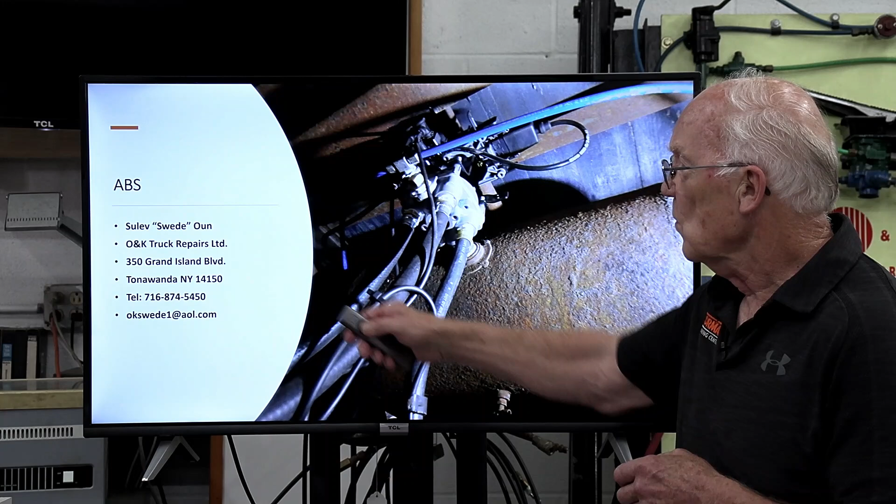I'll put this on over here. We'll click it. That's me. We're not going to worry about me. We're not going to worry about that, but we'll get into the first slide here.

But part one is going to be more or less of an overview. We'll get into a little bit of the regulatory portion of it. And the reason I want to do the overview and what ABS is all about is because it is so important. I just did a critical thinking class in Pittsburgh, and one of the things in the critical thinking slide, this was for the automotive, is trying to get a game plan. And the first thing that we discuss in critical thinking is get on site someplace, go into your information systems or whatever you're using.

The first thing you should always try to do is ask, what is happening here? How does it work? And that's what I want to accomplish, because I'm a firm believer that if you know how it works, you're going to basically figure the whole system out. You really won't need me, you just need some extra information. And that's what I'm doing.

The other reason I picked ABS as a subject is that I do a lot of driver trainings. When I get a fleet and I do driver training, it takes me about 4 hours. We cover some of the violations and stuff. And when I get into the portion of the violations with ABS, it's not antagonistic, but boy, the drivers, every one of them, they don't get it. They write up the vehicle with the ABS issue, the light is on, they pick it up next day, the light is back on, and it's ongoing, and I hate to say it, but they're like, why can't they fix it right the first time?

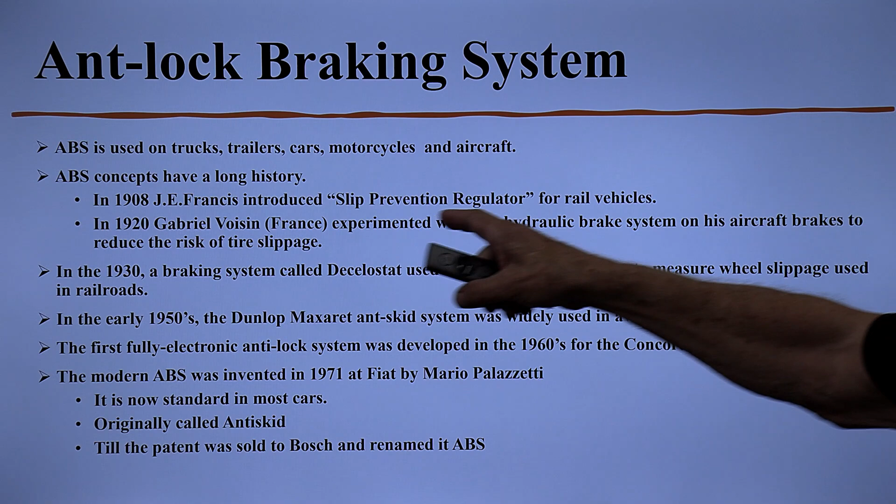Let's start out with a little bit of history. ABS is used on trucks, trailers, cars, believe it or not, on motorcycles, and of course has been in aircraft. The concepts do have a long history. We can go back to 1908, when it was first introduced. They called it a slip prevention regulator for rail vehicles. And there's a guy in France back in 1920 who experimented with the hydraulic brake system on his aircraft brakes to reduce the risk of tire slippage. And engineering-wise, that's why you always hear slip, wheel slip.

At first I was a little confused when I belonged to the Society of Automotive Engineers and I'd hear the word slip. Basically, I'm more comfortable with, hey, my wheel is ready to lock up, my brakes are coming on. But nevertheless, back in 1930, a system called Decelostat used direct current generators to measure wheel slippage in railroads. Just think about how we're looking at AC now from your sensor.

In the 1950s, the Dunlop Maxaret anti-skid system was used in aviation. The first fully electronic anti-lock system was developed in the 60s for the Concorde aircraft. And of course, we definitely migrated it into the cars.

ABS 71 at Fiat. Now it's a standard. Pretty near every car has ABS, okay? Originally they called it anti-skid till the patent was sold to Bosch, and Bosch, of course, renamed it what you guys know now as ABS.

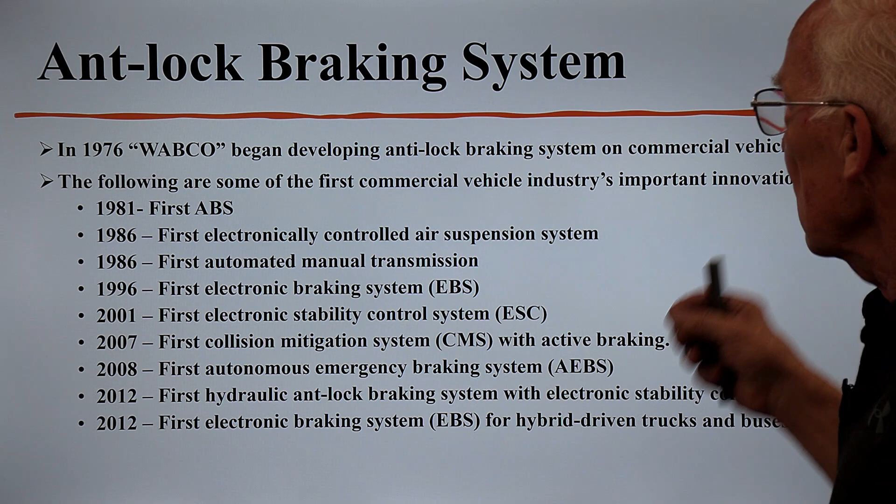So now let's jump into the commercial vehicle. WABCO, Westinghouse, they began developing anti-lock braking systems for commercial vehicles. I went online and I wanted to see who the players were. WABCO definitely, most certainly, is a huge player. It started out as a huge player. First ABS, electronically controlled air suspension, automated manual transmission, and you see it on the list.

But when it comes to ABS, this 2007 collision mitigation system with active braking, the ABS is the foundation for any of that stuff there. And of course in Europe, very big, EBS. Okay? EBS, look for it to come into our country as a mandate.

Now, ABS history as far as my time, when I first started, required in 1975 under the Federal Motor Vehicle Safety Standard. It was kind of an indirect requirement. That was a pivotal year where, with the Federal Motor Vehicle Safety Standard 121 pertaining to air brakes, they came up with all sorts of tests that the manufacturers have to do, pressures, thresholds, stopping distances, and so on. So the easiest way to do it was, hey, maybe if we put this ABS on, it might help some of those areas. And that's why you want to look at it as an indirect requirement.

However, in the day, it had many problems. And I'll be honest with you, I'm not going to make too many war stories, but when I first started to see this ABS on vehicles, we didn't know what ABS was about. We popped the wheels off. We were there, what the hell are these notch things over here? What is this thing sticking in there? It's got a nut, a jam nut, couple wires coming out and stuff. And we didn't have the means of educating, we didn't have Google. We didn't have none of that stuff in the day.

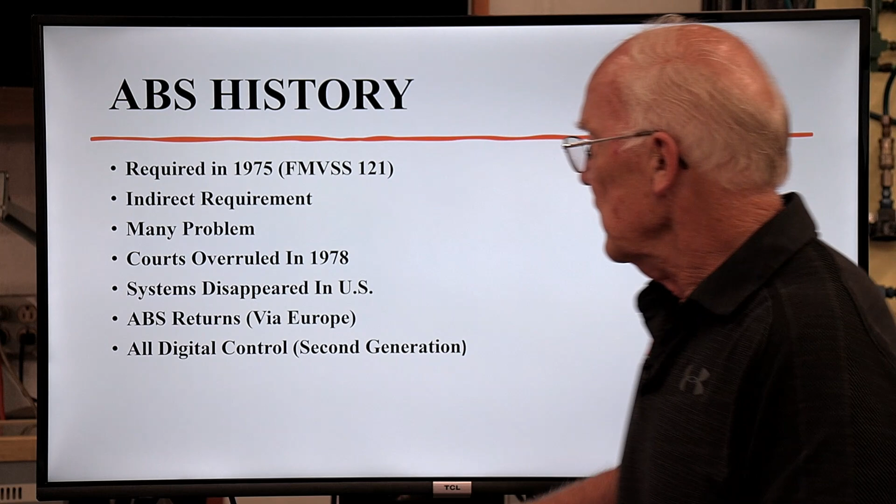And that happens quite often. In Europe, they did not get rid of it. They stayed with it. They took that and turned it into a second generation, all digital control. They worked all the bugs out of it. And of course, the National Highway Traffic Safety Administration did a study. They revisited this back in 1988. They looked at 200 tractors, 50 trailers, and they said, you know what? This second generation is really working well.

Even though there were manufacturers offering it as an option, these dates right here, guys and gals: March 1st, 1997, all tractors; March 1st, 1998, ABS mandatory; March 1st, 1999, and you have it in your handout. It became mandatory. It was cast in stone. It was part of the Federal Motor Vehicle Safety Standards, and of course the Federal Motor Carrier Safety Regulations picked it up, and that's where they pick it up for the roadside violations.

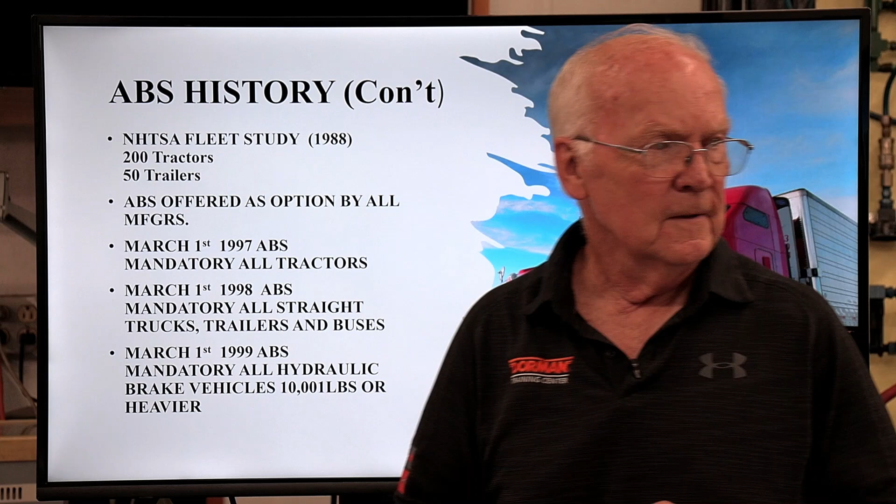So I was going to say, I remember when these things first came out. So then March 1st, that date was always huge. So I'm just going to pick up this truck and trailer. So a vehicle would get pulled over on the roadside, and a lot of times everybody will forget this March 1st here, and they'll see a registration 1998.

And I would tell everybody, you can't either write it up or be careful that just because it says 1998, that doesn't mean it's March 1st, because you can build a truck just like cars in November of 1997 and you put it on the registrations in 1998. So that was an issue in the earlier days.

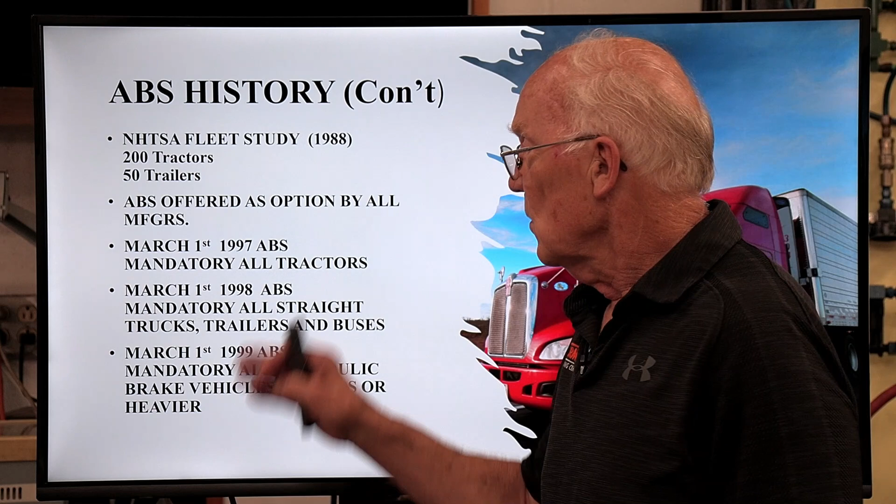You know, they would get written up, they would come in, and guys in the shop would look for the ABS, and they'd give me a call and say, man, somebody I think took them off. Nope, look at the door tag. What's it say? And chances are pretty good it never had ABS, just because it was built before March 1st. So just wanted to throw that in.

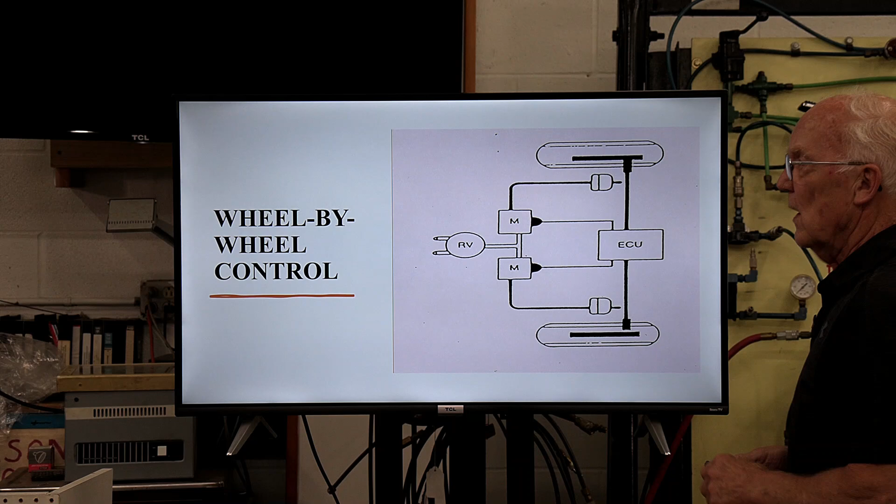There are systems, and there have been, and I'm not quite sure the benefits of this, and I don't really want to get into it, but this is a side control. This 2-sensor 2-modulator, also could have a 4-sensor 2-modulator, uses 1 ECU dual modulator valve assembly and 2 or 4 wheel speed sensors.

The ABS sensors are mounted on 1 or 2 axles only. The curb and roadside of the trailer are controlled separately. So it's like, yeah, you're controlling these over here, but you're only sensing from one. But the bottom line is that just realize we have had different kinds of systems out there.

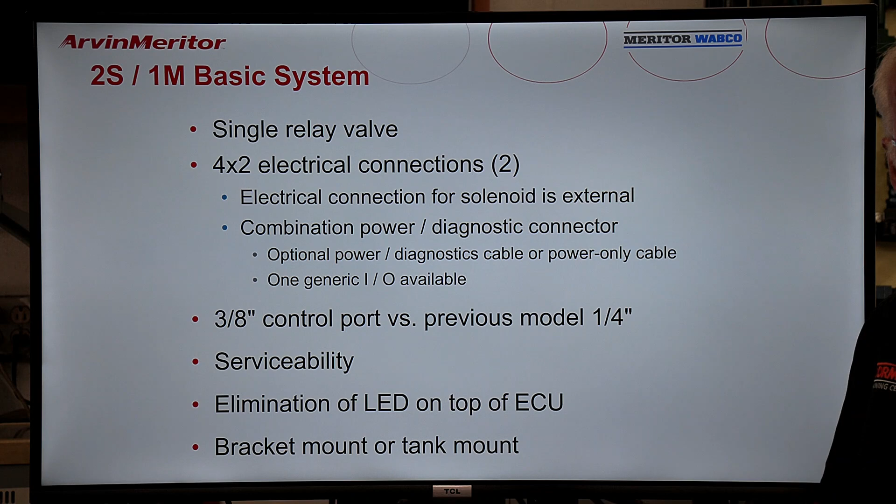Now, Meritor WABCO, just so you see, you're going to see a few slides with Meritor WABCO. Tim Hale, from Meritor, and a lot of these Meritor people throughout the years, they've been very gracious with me. I've actually built a brake board that we'll use next month. They provided me the computer and sensors and everything because they feel it's very important that everybody has access to information. So they always gave me okay to use some of their slides to pinpoint and show, I mean, it's their systems, and that's why you see the ArvinMeritor WABCO.

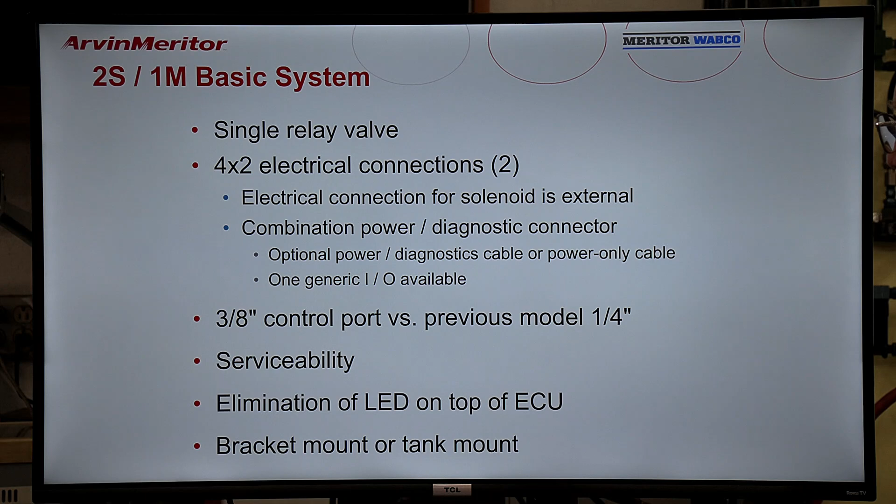Your most basic system, again, is this 2-sensor, 1-modulator basic. It's a single relay valve. It's got a couple electrical connections, solenoid is external, diagnostic, and we'll get into it a little bit more, and 1 generic input-output is available. And of course, you got your control ports, okay.

There's serviceability, elimination of LED on top of the ECU, bracket mount, or tank mount. Okay, and this is basically what you're going to see, for example, on a trailer. It's about as basic as you can see. The earlier versions were very boxy, and if you go to try to get a replacement for that earlier valve, you're not going to get it. But this is a drop-in.

And what I've always liked about all of these systems is it's kind of more or less a plug and play when it comes to harnessing. The only difference is you got an older trailer and you pull that relay valve off. A lot of you guys, if you've done that, you've noticed your height by the cross member, you might have to do a little kind of configuration to make it fit over there. So, monitoring my chat box, and this is another very popular one you see over here.

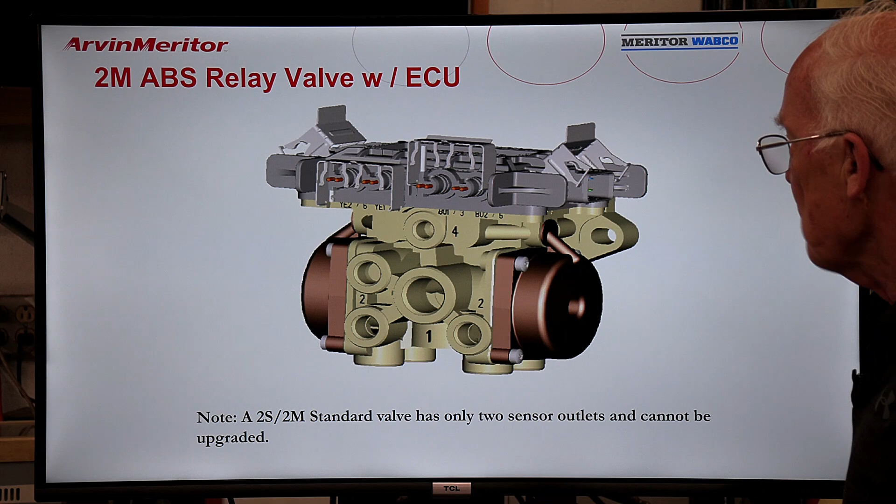2-sensor 2 modulator standard valve, has only 2 sensor outlets, cannot be upgraded. Okay, and I'll hold one of those up later on when we get into the computer and stuff. So, you know, 4 sensor 4 modulator valve.

When these frame mounted came in with a little black cover, you unbolt the bolts and everything, I was totally amazed in the environment that they get. I really haven't had any issues with the connections. The connections are pretty good.

If you open up the cover, and again, I'm not sure, you guys are probably from everywhere. I see somebody from Alaska, Las Vegas and stuff, but over here, Alaska, I guess, is pretty close.

What we have over here with the snow and stuff, the connections look pretty good. I very rarely see any connection problems. Do they fail? Yep, it's like anything else, they'll fail.

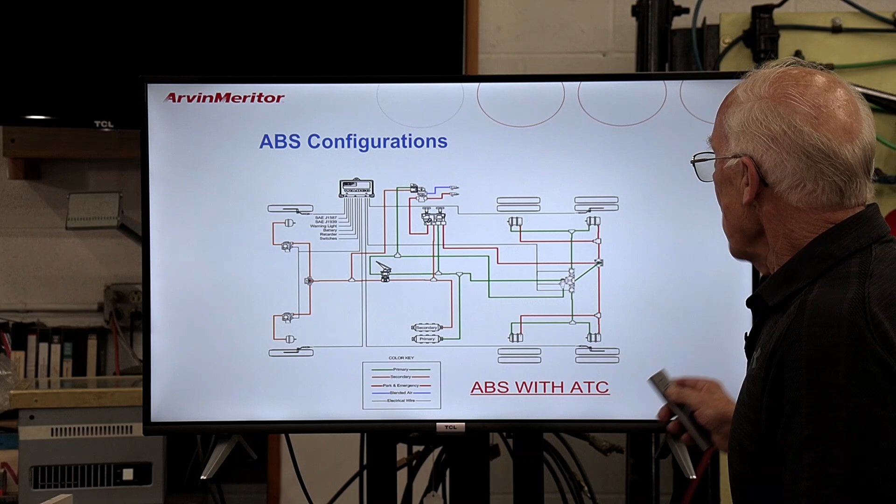Now, this is just a nice schematic again. When I do my brake courses, regular brake courses, everybody gets a little schematic so they can follow what we're doing here. Of course, you notice your foot valve over here. You have a quick release valve over here, and this happens to have the solenoids for the ABS separate on each side of the chassis. But you can get it as a package, okay? This quick release valve is combined as a package over here, just like you see over here, okay?

So I'll show you the add-on to this. I'm gonna click it once. By putting this little guy over here, you turn this into a traction control type of a system. Okay? So I'll hold this up for a second. If you can zoom in over here, Bobby. This is what it would basically look like, just in case, give you a better view.

If this is your first exposure to it, typically you would have a relay valve. This is the one in the center here, okay? Prior to ABS, that was always there. But this stayed with it, right? And then on each side, because it's a rear, this is where you have your electrical solenoid valves. And of course, over here, you got the plug. It's a 3-plug system over here.

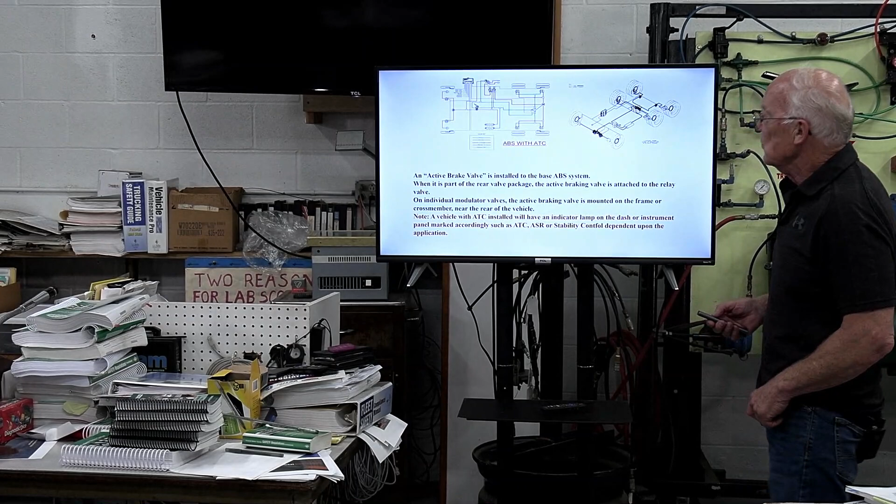But what happened is, if it's just a base ABS, you won't have this on. You will have this solenoid added for traction control, and to be very honest with you, a similar solenoid works with active braking. So we're taking steps here. We're taking steps. We'll look in what kind of trouble we get into. So I actually put that on my slide.

An active brake valve is installed on the base ABS system. When it is part of the rear valve package, the active braking valve is attached to a relay valve. On individual modulator valves, active braking valve is mounted on there. Vehicle with ATC installed will have an indicator lamp on the dash.

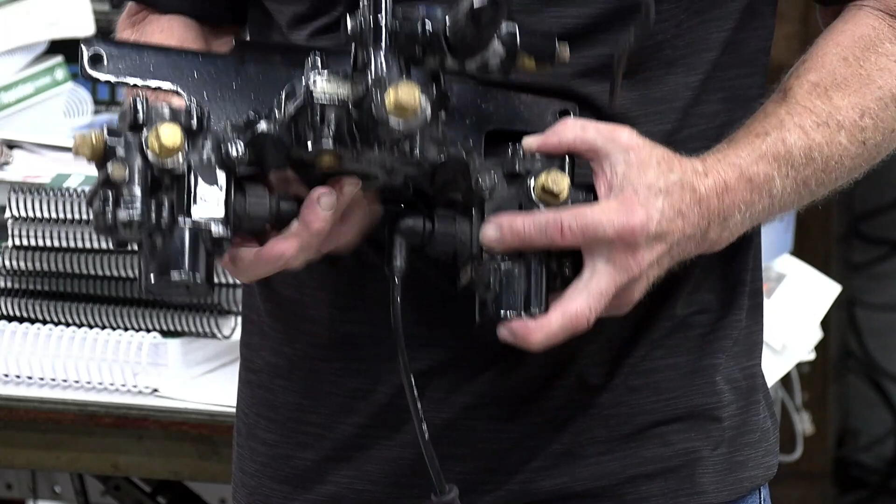So basically what that active brake is involved into, you probably call it collision mitigation, it is an electrical solenoid. So what happens basically is, typically without this valve over here, you have input, every time you step on the brake, this is your control over here. Pretend this isn't here. You step on the foot brake, air goes in here, and if you're not in ABS mode, these solenoids are de-energized. So when you step on the brake, you're still shooting air out to the chambers over here, okay? They'll go out to the chamber, one on each side.

But what happens is, if via the ECU, you get in a situation, it's like, oh my, we're heading, and it gets very involved. We're getting really into electronics and multiplexing. But all of a sudden, it goes beep, beep, beep, beep. You're getting awful damn close to the vehicle. And after a certain point, the computer says, nope, start applying the brakes in here. And right now, that's a little contentious here.

But the same thing happens with traction control. Computer says, hey, I want to put the brakes on because you're slipping. And then if it's for traction control, you can see electrically it actually activates that portion of it. So traction control is really a mirror image of ABS.

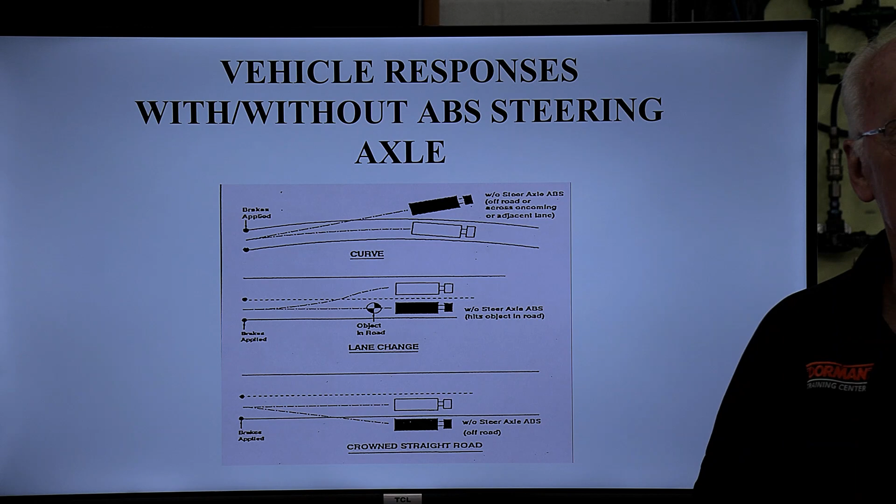6 sensor with ATC. You can't get any better than that. Sensor on each wheel and so on, you know. Then the question comes in, especially when these first came out: if you were the person buying these vehicles, if you had to buy a fleet, why would I want this? Why would I even, I don't get it, you know.

So what happens is the feds came up with a nice little, and I took some of these slides from there, and it basically shows you that you don't necessarily have ABS on each wheel, but that the steering is so huge, okay? So if you look at this one, the middle one over here, without steer axle ABS, you're going down the road, and all of a sudden, oh my gosh, there's an object up front. And you want to steer away from there, and you're going to slam on that brake.

I mean, give it everything you want. And chances are pretty good you're going to go into what we call steering plow. Okay? Your steering wheel is turned, your wheels are turned, but you're going straight into the object. So where ABS is a benefit is if you look over here, it allows you to steer away from that object. Right? And that's the whole idea of that slide there.

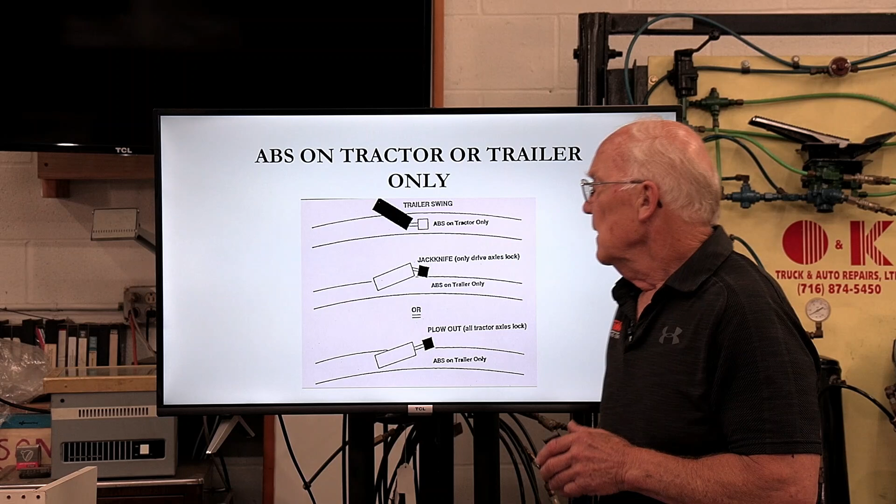The other issue we have is, when I get into my regular brake courses, I do a lot with the balance of the braking systems. Each wheel has to do its share of work and everything. But realistically, in the real world, you might have a tractor that has ABS, and you're hooking up to an older trailer, no ABS, and these are the different scenarios. So depending on who has ABS, who doesn't have ABS, you could set yourself up into some issues still, you know, the jackknives, the trailer swings, and so on.

And this is why it's so important to know that, yes, you have ABS, but you always want to drive, pretend you don't have ABS. ABS doesn't give you the right to do stupid stuff on the road, if that makes sense, okay?

That system there, it needs power. It needs power. I mean, it is a computer. You have solenoids in there. They got to open, close. They got to exhaust and all that stuff. And that takes power. At a minimum, you're going to have ground, and you're going to have power.

So when it comes to the trailers, that was an initial issue. How do we get power to a trailer? Because you're not going to, just because now we have ABS, put a little tray underneath the trailer and put some 12-volt batteries in there. It's not about to happen, you know.

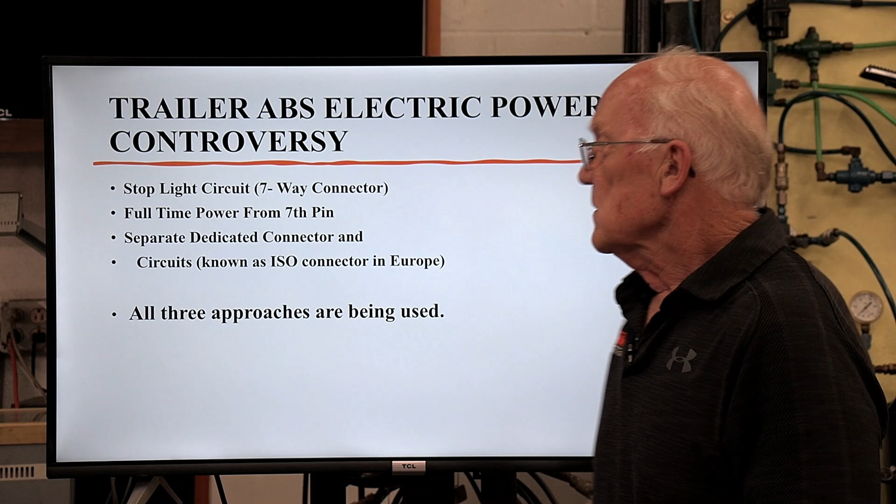So this is why you see, think about the stoplight circuit in your 7-way connector. Every time you step on the brake, you're putting power there, right? So that was initially a good way of doing it. We've always had that 7th pin, that blue wire in there. That is definitely a place to get your power.

And then if you came from the day I did, you might have seen tractors that had the 2 cables in there. You had your 7-way plug, and they might have had a dedicated ABS cable. Okay, all 3 approaches have been used, and they're still being used.

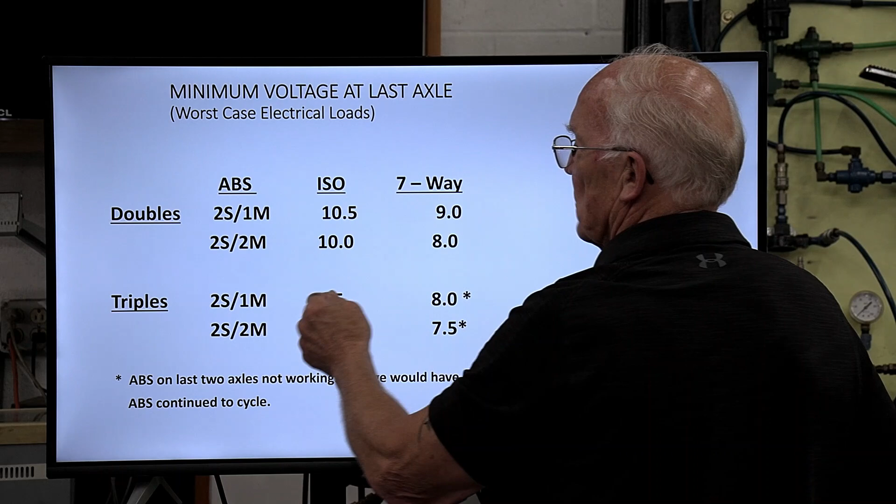Now, the other big issue is we're talking about electrical stuff, and this comes into play with voltage drops. Because if you look over here, it's one thing you got a single tractor and trailer, but let's put another dolly, let's put another trailer. Every time you hook up a trailer, you're going to have another connection.

By the way, just don't look at it as adding multiple trailers, but what about the connections even in a single unit? You guys that work on this stuff know, when I'm going to get into this voltage drop. But the bottom line is, let's take our 7-way plug over here.

For these solenoids to function and tether, you don't want to let it drop below 9, depending on how many sensors, modulators, valves there are, 8, and so on. So what basically happens is if you start dropping it too far, you're not going to have enough voltage for these things to work properly. So that has always been an issue.

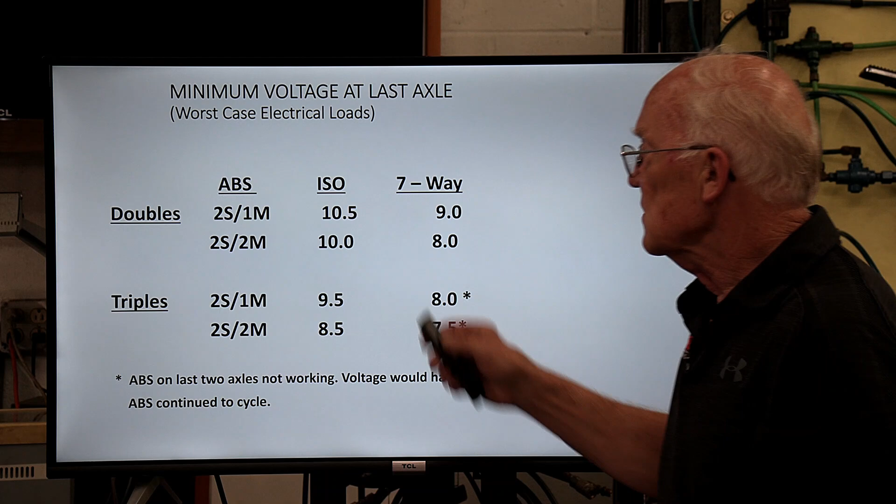This particular trailer came into our shop. The ABS light on the trailer has been on for several years. Trailer was bought from a dealer, it did pass inspection. I don't know how it did that for a few years. It came to our shop for inspection PM. We noticed that the sensor wires were cut.

So that means somebody was in there, maybe the light was annoying, it was on, so let's cut some stuff, and maybe if we eliminate this, nobody will pay attention. When I get pulled over, the light is off, everybody might think there's nothing wrong. But the ABS light comes on and stays on when powered up. So we could not get it to blink codes, so we're trying to figure out what the hell is going on over here.

So we had to go backwards, and what we discovered was someone at one time had been screwing around with it, noticed a white-green wire, and they're pretty near universal on these systems. That wire belongs to the light. Someone had at one time hooked the blue wire to the ABS light. If all you know is that blue wire is a constant wire, maybe somebody figured, to get the light on, I've got to hook it up to the light. It doesn't go to the light first; the blue wire goes to the computer. The computer decides what to do with the light. So I'm trying to keep it simple.

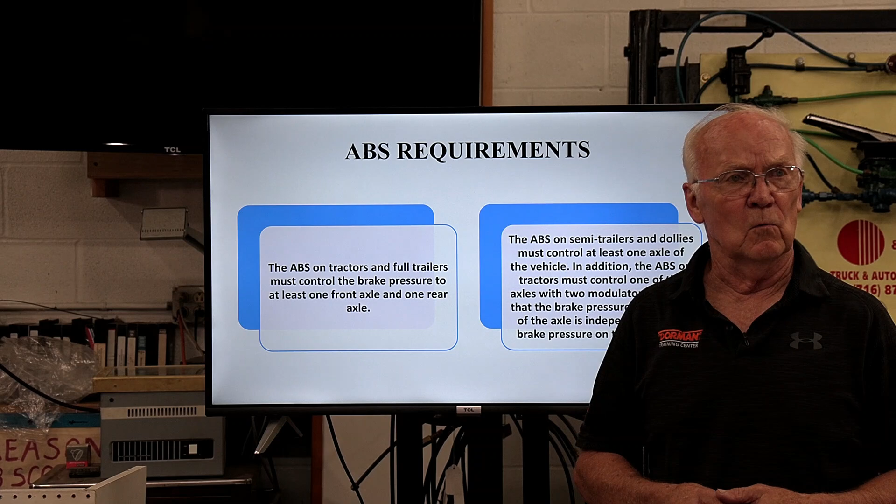Now, I mentioned we're also going to get a little bit into requirements. These are actual requirements. The ABS on tractors and full trailers must control the brake pressure to at least one front axle and one rear axle. There's no ifs and buts about it. So if you have an issue with the ABS, can't figure it out, and decide to disconnect it on one axle because the other axle in the rear has it, you can't do that.

These are requirements. The ABS on semi-trailers and dollies must control at least one axle of the vehicle. In addition, the ABS on tractors must control one of the axles with two modulator valves so that the brake pressure on one end of the axle is independent of the brake pressure on the other end. No ifs and buts. These are the regulations, these are the requirements.

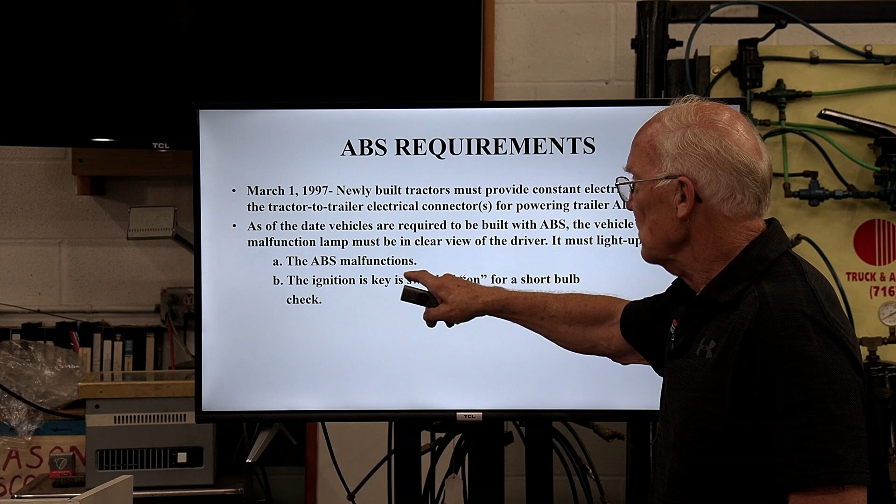Now, this is a huge one. March 1st, 1997, newly built tractors must provide constant electrical power to the tractor-trailer electric connector. From that year on, you've got to have the constant power. I'll show you in a few slides that you still can utilize the power from your stoplight; your stoplight winds up being the backup for these systems. As of that date, vehicles are required to be built with ABS. The vehicle's ABS malfunction lamp must be in clear view of the driver. It must light up when the ABS malfunctions and when the ignition key is switched on for a short bulb check.

And when commercial motor vehicle enforcement started to do this, they wound up with a real nice sheet, kind of a flow chart, that basically asks: was the vehicle built before this? Is it a truck? Is it a trailer? Was it built after that? And then you follow the flow sheet, because you're talking about tractors, trailers, and so on. And of course, commercial motor vehicles with hydraulic brakes too, they're mandated.

Ignition is switched on for a short bulb check, just like you would in your car. You turn on your light, and what do you want to do? You want to look at your MIL, right? You look at that little icon there to make sure that at least it comes on. If you do inspections, that's mandatory.

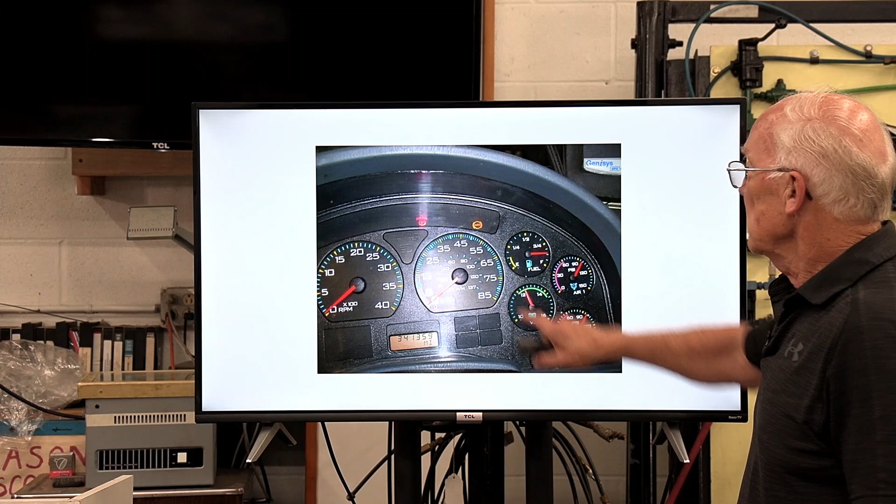The machine, we do NYVIP in New York State, asks questions before we plug it into the OBD. Did the light come on? Okay, and then the machine tells you start it up, did the light go off. So we're virtually doing about the same thing with ABS. And here's your ABS light over there.

1998, the malfunction lamp on trailers must be yellow, mounted on the left side of the trailer near the rear red marker lamp; on dollies it must be located on the left side. So these are requirements again. And it does the same thing, even if it's a trailer. Light up when ABS malfunctions, of course. Short bulb check, just like it would in a truck or tractor, when ABS starts receiving electricity. No longer required, this is an old slide, required after February 2009.

Now I'm going to tell you, I'm happy that this requirement wasn't dropped, with the trailer manufacturer saying, oh great, we don't have to put a light on. I am so glad that those lights are still on, because for me it works out good, and it should work out good for you too: the newer tractors have that little icon of the trailer on there for the ABS.

I'll get in a few slides to the PLC, how it works and everything, but the premise is that now the driver can sit in the seat and see if you have an ABS issue with the tractor. Of course, that light's going to come on. And if you have an issue with the trailer, the other icon, a picture of a little trailer, will come on and stay on. So while in transit, the driver doesn't have to look in the back for the light.

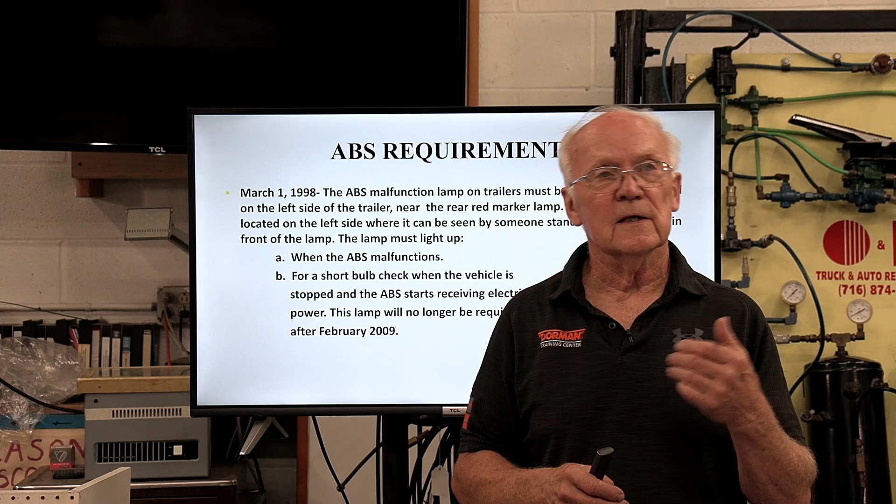But you're looking at communication here. So that opens up the door. Hey, that light is on over here. Is it a communication problem? Did something go wrong with my communication? Is that why it's on? Is there a genuine problem? Most of the time, if I see the corner light still on over there, that tells me I definitely have a genuine problem on that trailer. So I like it that we kept that light on.

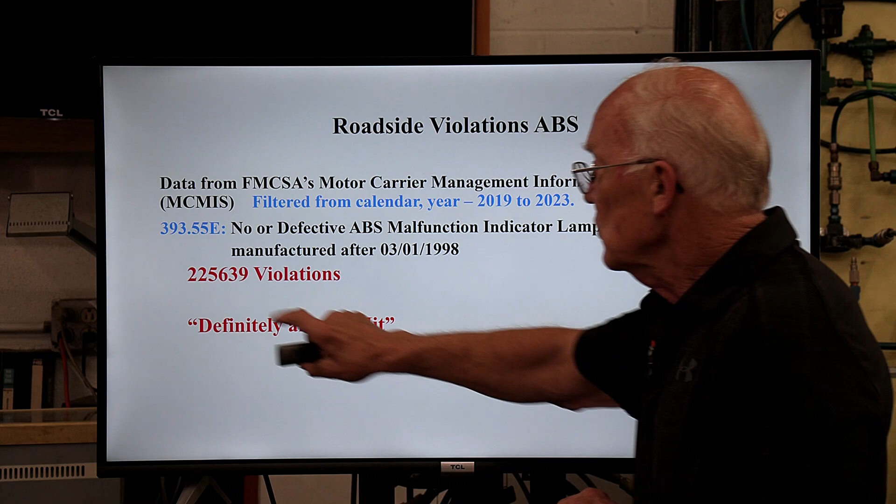Now, data from the FMCSA Motor Carrier Management Information System, filtered from the year 2019 to 2023. Your ABS stuff winds up being in 393.55. In that Federal Motor Carrier Safety Regulation, it says no or defective ABS malfunction indicator lamp for trailers manufactured after 03/01/1998. Those 2019 to 2023: 225,639 violations.

Guys, I can't emphasize enough, ABS is such an easy hit for vehicles when they get pulled over. All you've got to do is look at the bulb. You don't have to crawl underneath. It's not like you're trying to look at brake linings, hoses, and everything else. You just do a simple walk around or peek your head in through the window, and there it is. So this is why it's important we really get comfortable with ABS and make sure that we fix them properly.

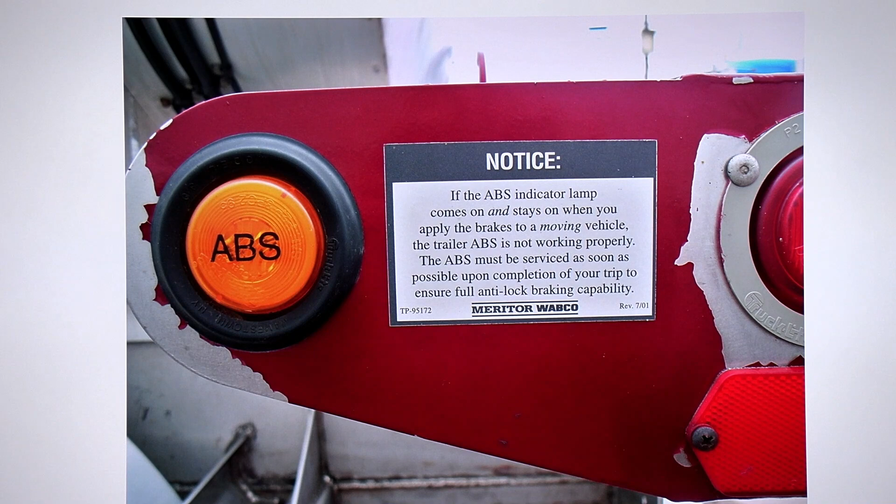And of course, some manufacturers, Meritor WABCO, for example, if you notice here, say if the ABS indicator lamp comes on and stays on when you apply the brakes to a moving vehicle, the trailer ABS is not working. ABS must be serviced as soon as possible. So in this scenario, when you stepped on the brake, your ABS actually did come on, but you weren't using constant power, and that light lets you know you do have a problem.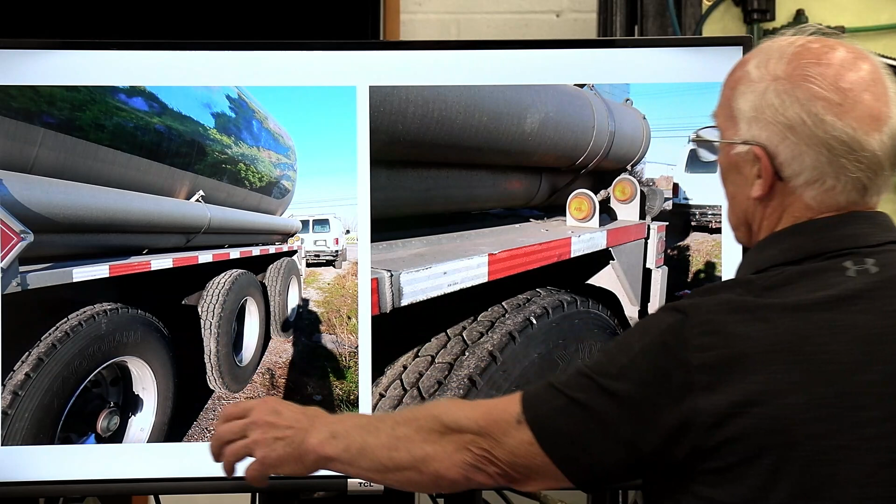By the way, this also has a system in there that uses the wheel speed sensor, that if somebody backs up this trailer, it'll automatically lift that axle up. So it's as simple or as complicated as you want to make it. Okay? When replacing bulbs, most of the time I don't have problems with the LEDs because they have that integral load resistor built into them, but the early ones weren't set up that way. So, rule of thumb, incandescent works just great on there.

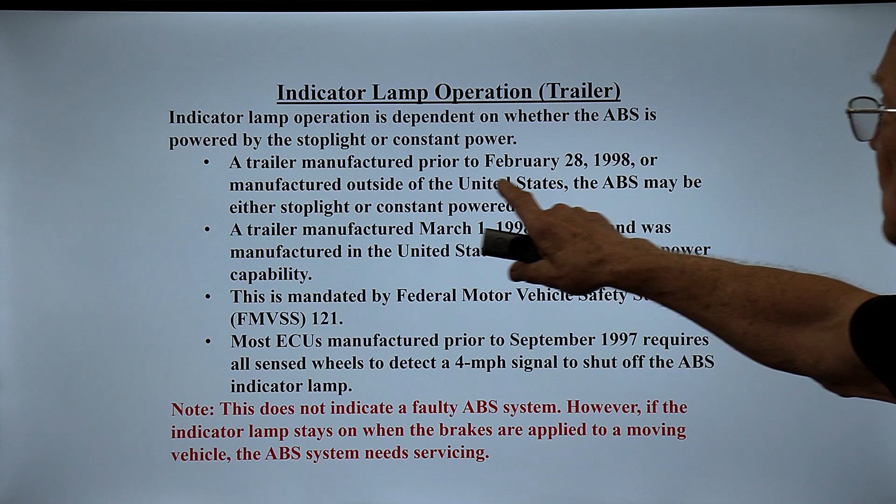Indicator lamp operation on trailers. Again, I'm rushing too fast. Indicator lamp operation is dependent on whether the ABS is powered by the stoplight or constant power. All you got to remember, guys, is that a trailer manufactured prior to February 28, 1998, or manufactured outside the United States, say you bought that trailer in Canada, the ABS may be either stoplight or constant power. If it's manufactured March 1st, 1998 or later in the United States, it will have constant power capability. And again, it's mandated through the Federal Motor Vehicle Safety Standard 121.

Now, most ECUs manufactured prior to September 1997 require all sensed wheels to detect. What happens is that with the early ones, if you did your fix, changed sensors, whatever the case may be, chances are pretty good the light was on. And in the early days, everybody would panic. All you had to do was hook up the tractor, just pull it out of the shop, and you don't have to go crazy speeds. If the wheel sensors detect 4 miles per hour, you watch the dash, you watch the rear light, and your light will go out. You're all done, okay?

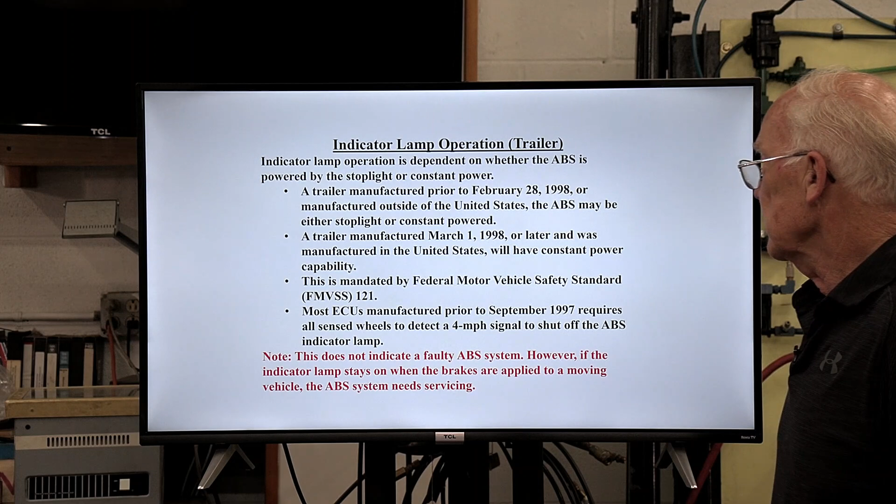New vehicles must be capable of receiving and sending signals to turn on the malfunction light inside the towing vehicle. Trailer and dolly ABS will have the capability to send an ABS malfunction signal to the towing vehicle. Towing trailers must also be able to relay an ABS malfunction signal from the vehicle it is towing to the vehicle towing it. So we're talking about a tractor hooked up to a trailer, and as I already mentioned, on the dash you're going to have those couple icons. The way they were able to do that is this PLC, power line communications, okay?

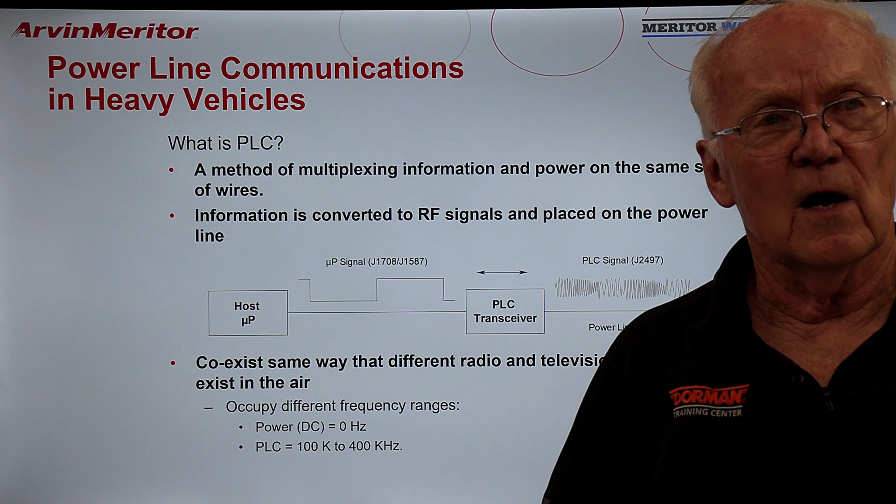And it is a method of multiplexing, and I'm going to tell you right now, these systems were getting into active braking, roll stability, stability control, wild stuff going on, guys. As each year we get newer vehicles, they're going to be controlled through a multiplex system, CAN high, CAN low, and everything else. But everything had kind of a start over here. So again, it's a method of multiplexing, okay?

Basically, this information is converted to radio frequency signals placed on the power line, and they coexist the same way different radio and television signals do, if this is a good comparison. They just have their own little frequency that they utilize. You're going to have a host and transceiver, without me getting stupidly crazy in here. But why do we go that direction? It provides a means to communicate trailer ABS indicator status to the tractor, basically light a light.

And on that 7-way plug, we really didn't have any more connections, no more positions available on the standard J560 connector. Industry says, wow, this is great. We don't have to change the 7-way connectors. SAE defined it, and voila. We never had to change the 7-way connectors.

I went through that period in time when I first got out of the service years and years ago, and when I came back from overseas, a place I'd rather not talk about.

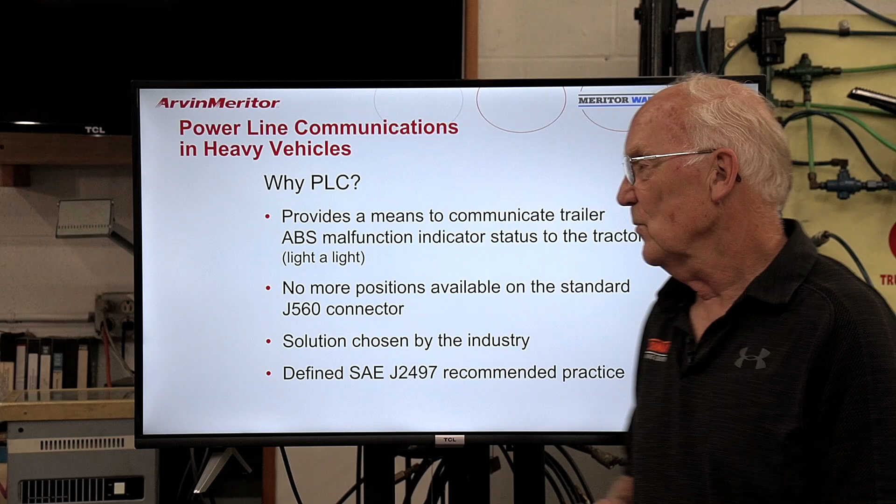But anyway, I remember when we had the 6-way plugs, and then slowly but surely the trailer manufacturers started to migrate into the 7-way plug. Then all of a sudden we had to get adapters, 6 to 7-way and so on, and that was never fun.

Now, I'll be very honest with you. Meritor WABCO, Bendix, they are so great. All of them are great with their troubleshooting stuff and what to do, and you get a lot of that information online. Driving mixed PLC, non-PLC, don't worry about it. If a tractor is equipped with PLC and the trailer is not, or vice versa, the in-cab ABS indicator lamp will not illuminate. However, ABS will continue to function.

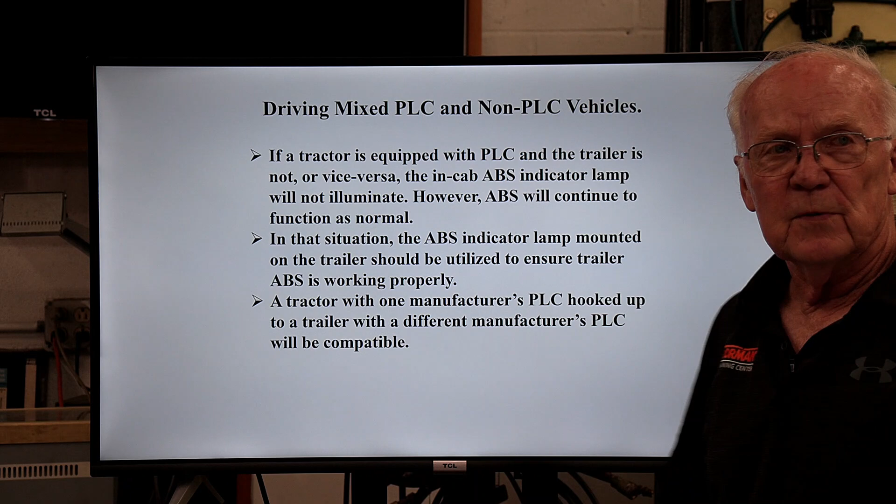See, we're back to the same thing. I got a newer tractor, I got an older trailer, vice versa, and so on. Okay, everything is compatible. Doesn't matter who the manufacturer is. They are all compatible with that PLC. So that's a nice thing to have, that kind of a standard. Okay.

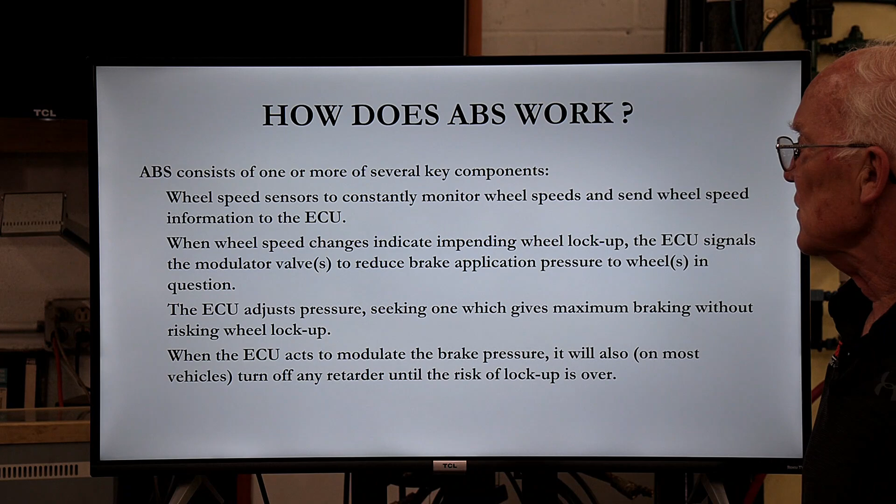This slide here, all I'm trying to show is components. Not that many components, guys. You got a tone ring, you got a computer, you got a sensor, modulator valve, and of course the harnesses that work in conjunction with it. So it's not really that complicated of a system. And again, I spelled it out.

Several key components: sensors constantly monitor wheel speed and send wheel speed information to the computer. When wheel speed changes, it indicates impending wheel lockup. It doesn't wait for the wheels to lock up. It's got the algorithm built in there. Hey, listen, I'm seeing where there's a possibility of a wheel being locked up. That's when the computer's going to act, okay?

What's it trying to do? Via the modulator valve, reduce brake application pressure to the wheel or wheels in question. And of course, the idea of the computer is, I'm the brains, I'm going to adjust the pressure, seeking one which gives maximum braking without risking wheel lock. Okay?

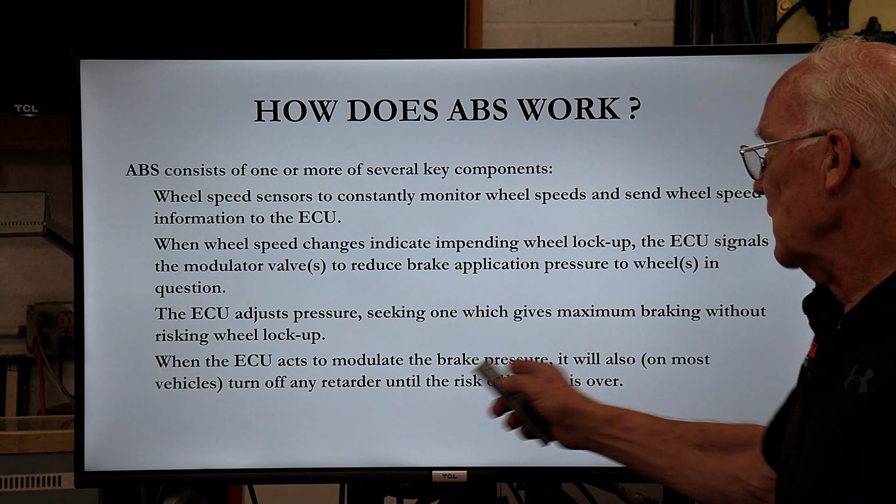And I really don't know of any that don't turn the retarder off. So when the ECU actually modulates brake pressure, pretty near, you can take it to the bank, anything with a retarder is going to get turned off. Okay? This continually checks itself for proper operation and detects a malfunction. Look, engine computers do it, they all do it. This is nothing new if you get into your handout and you read that portion, okay?

Now, the ABS modulates brake pressure much faster and more accurately than drivers can. Why? Because electronic controls are very fast, and the modulator valves are physically closer to the brakes than is the truck's foot brake. And it makes all the sense in the world. I like keeping things stupidly simple. Can't get any simpler than that.

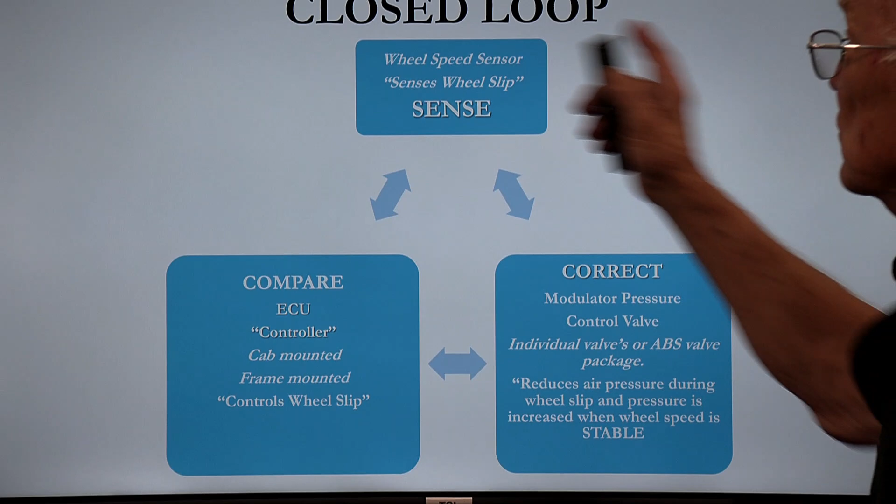I compare it to a closed loop system, when you talk about emissions and the engine gets warm and all of a sudden the oxygen sensor starts working, the computer takes control, adjusts the fuel and all that stuff. Well, you're basically doing the same thing over here. You got the wheel speed sensor, senses wheel slip. Remember I mentioned years ago when I got into some of the materials, I said, wheel slip, what the hell is wheel slip? Slipping across the road, where I'm more comfortable with the wheels getting ready to lock up. Okay? So you have a controller that compares that information constantly.

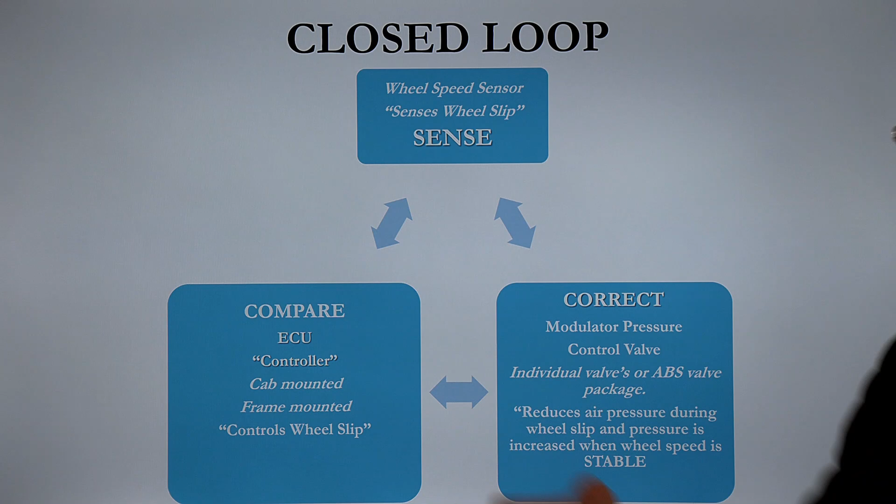The controller could be cab mounted, frame mounted, and the whole function of it is to control that wheel slip. And of course, how does it control it? If it has to, it'll go into correction mode. The actual physical portion that does it are the modulator valves. They control the pressure. They could be individual valves. They could be a package, okay? And they basically reduce air pressure during wheel slip, and pressure is increased when wheel speed is stable. You can't get simpler than that.

Now, there is traction control involved. That's a mirror image of ABS. Some vehicles also use a traction control system in conjunction with ABS. Traction control helps ABS improve vehicle traction by minimizing drive slip.

Should a single drive wheel start to slip, the traction control system automatically modulates air pressure to the wheel, transferring engine torque to the wheels with better traction. Look, just think about you're stuck in the snow someplace, your wheels are spinning. If you had Boy Scout training, you probably took some sand or something with you. Throw the sand or whatever underneath it, and the wheel stops spinning. You're providing torque for it. Well, instead of somebody going out there, it does it automatically.

Now, when this traction control came on with cars and everything, I'll be very honest with you, early days, in my area here with the snow and ice, just think about it, every time you put it on, you're also wearing what? Linings and pads and stuff, but they've worked through it.

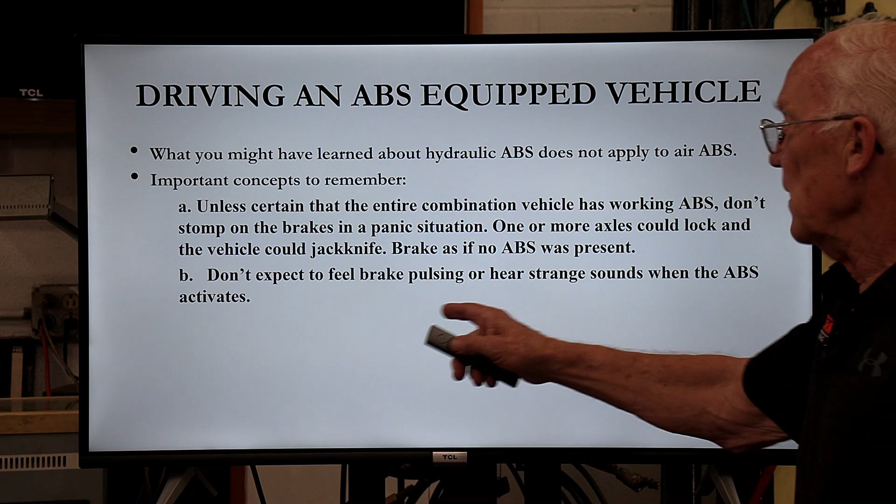Driving an ABS-equipped vehicle, what you might have learned about hydraulic ABS does not apply to air ABS. Important concepts: unless certain that the entire combination has working ABS, don't stomp on the brakes in a panic situation. One or more axles could lock. Don't expect to feel brake pulsing or hear strange sounds when the ABS activates.

Unlike your hydraulic brake system where you got accumulators, motors and everything else, when you step on that brake pedal, you have air waiting at that foot valve and you're just metering air. You're not magically giving it more air. You can only get as much air as you're allowed in that position of that pedal. Okay?

Operate mixed combination vehicles. Don't expect to feel brake pulsing and hear strange sounds. You're not going to have that. Operate mixed combinations the same way one would operate totally non-ABS. If you zoom in, I can't help but emphasize, keep it simple. You have your base brake system in here. You got quick release valves. All you did, you added a couple solenoids here. You're still trying to get air to the chambers.

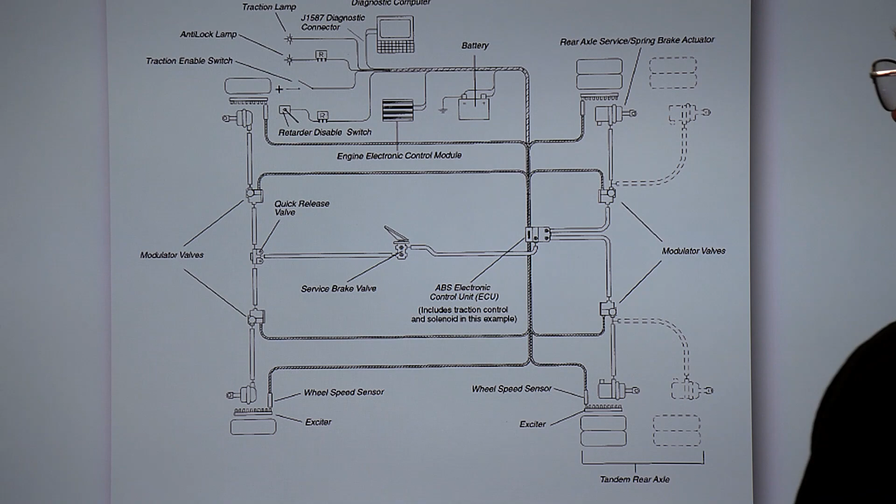So if all these wires and sensors weren't here, you step on the brake, you're going to brake. And that's important because unless the computer says, hey, I need to do something, your wheel is starting to slip, you're just bypassing all this stuff. You're stepping on the brake and your brakes come on normally until the computer makes a decision: I'm getting a reading over here, this wheel is starting to lock up a little bit. Electrically, let's open up the valve and exhaust some air.

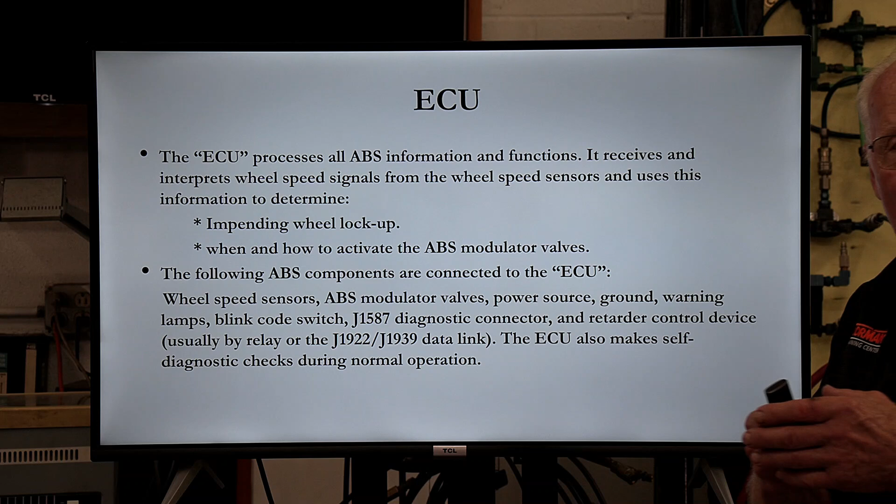The ECU processes all ABS information, receives and interprets wheel speed signals to determine impending wheel lockup, and when and how to activate the ABS modulator valve. Keep it simple. What's connected to this computer? Wheel speed sensors, the modulator valves, power source, ground, warning lamp, blink code, and so on. And the ECU also makes self-diagnostic checks during normal operation. So it's not like an engine with a harness of huge plugs to contend with. It's kept fairly simple.

During braking, the ECU uses the voltage pulses from the wheel speed sensor to determine wheel acceleration and decel. If the ECU determines that the decel rate of the sensed wheel suggests imminent lockup, it's going to command the ABS modulator valves to modify brake pressure as needed. And it's going to send a signal to the warning lamp or blink code lamp to communicate if there is a fault. And it's going to send a signal to retarder control in cases where use of the engine brake on a low friction surface might lock the wheels.

In a constant power system, the ECU activates, then begins a self-diagnostic check of the system when the ignition is turned on, and you'll always hear that click, click, click. In a stoplight powered system, the earlier systems, the ECU activates when you apply the service brake. Trailers from March 1st, 1998 have to have constant power. Stoplight power is used as a backup in case you lose that constant, that blue wire. And I even threw this picture in of the trailer.

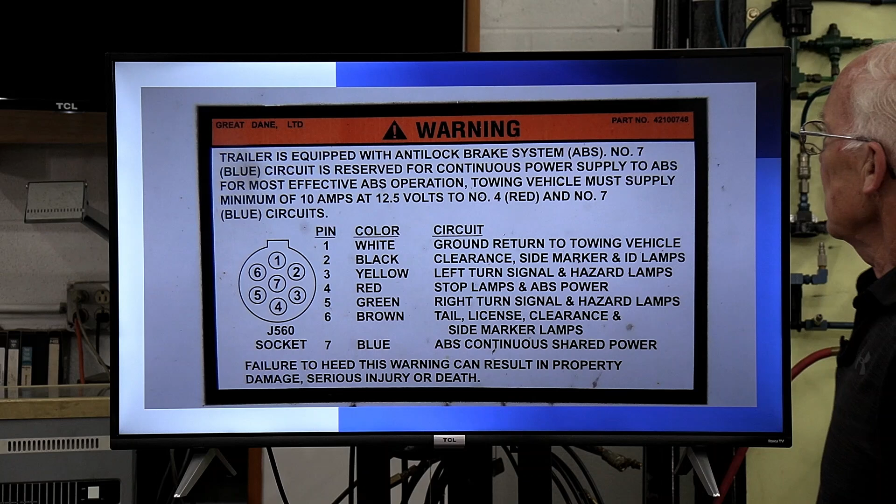Trailer is equipped with anti-lock brake system, number 7, blue circuit reserved for continuous power. Just to verify everything I've been saying here. Towing vehicle must supply minimum of 10 amps at 12.5 volts. See, I like this because right there, if I put my amp probe on there and my voltmeter on, I know exactly what I need to get out of it, if that makes sense.

All ABS, and Bendix has what they call a chuff test, okay? All ABS systems go through initial self-test when powered up. Basically, it is a bulb check and test for any issues with ABS. Typically, it takes 2.5. This chuff test, just so you know, became an issue.

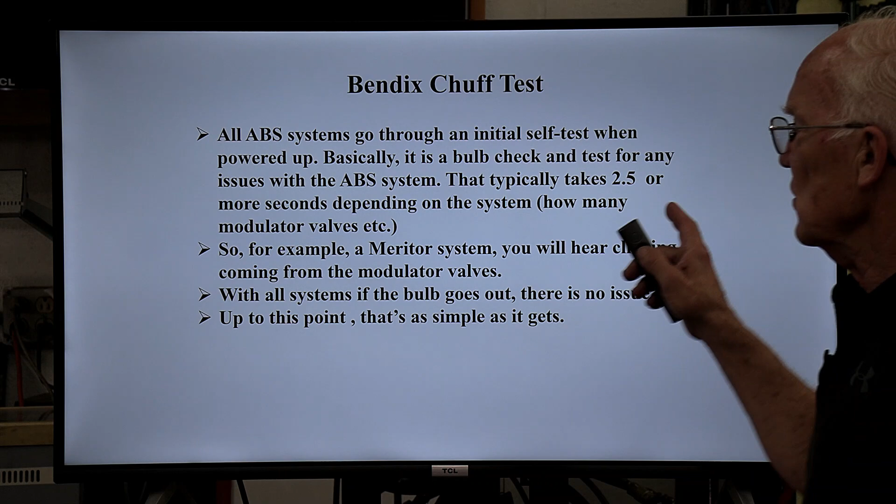I think a couple years ago in our state, I had one of the enforcement guys call me up, and they got caught into kind of like, some false violations were written. It wasn't clearly cut on how to check the ABS, some certain do's and don'ts. So he asked me if I could help him out, write a call for action with the CVSA, and then it wound up being nice because then they put a service bulletin out to address this type of issue so everybody understands how that works.

Now, going beyond that, for example, Meritor system, you will hear clicking coming from the modulator valves. With all systems, if the bulb goes out, you got no issue. Up to this point, that's as simple as it's going to get. Now, back to the chuff test, okay? This is on Bendix. This is a separate test check that kind of confused everybody on the roadside.

On constant powered systems with ignition on, air fully charged, and service brakes applied. So if you had the guy step on the service brake, you would hear this air puff and all this stuff, and that confused everybody. Their system energizes the modulator valves in a specific manner to allow, via the air puffs, a technician opportunity to verify they're operating properly. So if you hear the puff, puff, puff, it's like, hey, I think you got something wrong with the ABS. And that's what on the enforcement side had to be addressed.

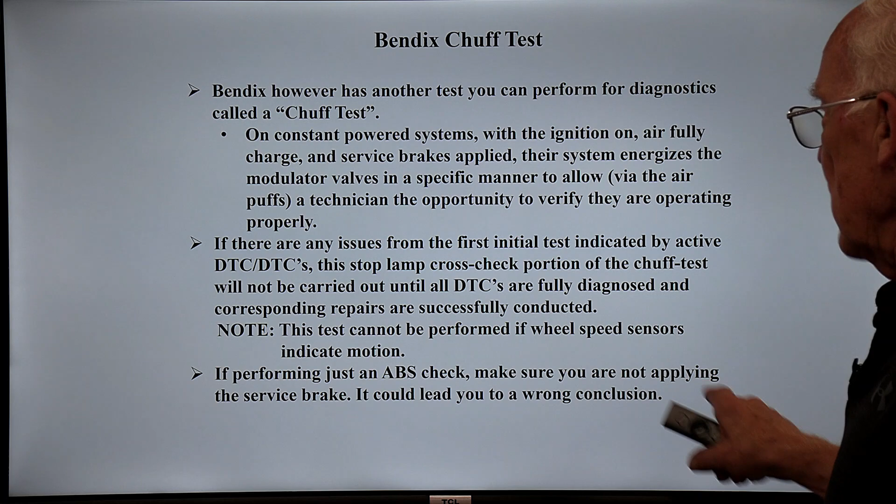If there are any issues from first initial tests indicated by active DTCs, the stop lamp cross-check portion of the chuff test will not be carried out until all DTCs are fully diagnosed. Tests cannot be performed if wheel speed sensors, you got to be sitting there, okay? So if you're performing just an ABS check, make sure you are not applying the service brake. It could lead you to a wrong conclusion. So I just wanted to mention that, that's why I said on that previous slide, everything up to that point is simple.

Computer-wise, I don't want to spend 2 minutes. This is a computer. It doesn't matter where it is. It's just a bank of memories over here. That's all it is. That's the inside of a computer. I'm looking at the clock. We got about 10 minutes left, and I got a lot to do here.

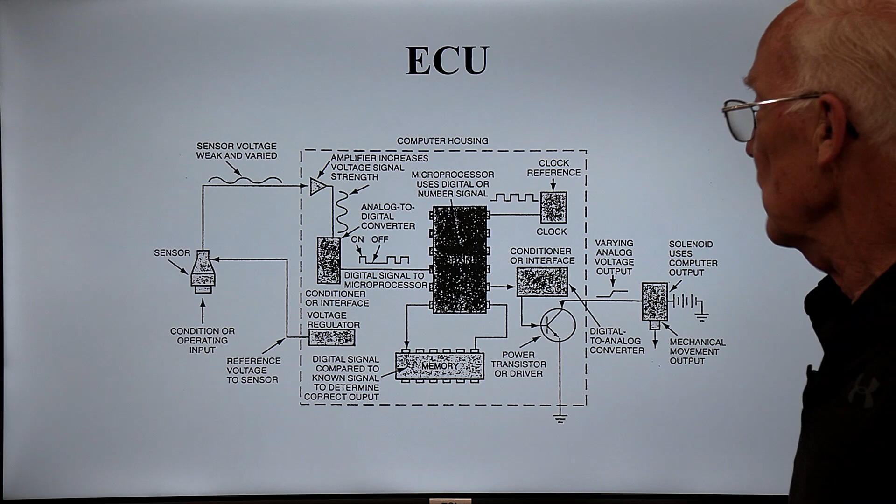So if you've never bothered to think about it, this is the sensor voltage pulses. Pulse generator sends out weak AC, and then it goes to the amplifier. This is inside the computer. It tries to make it a little bit stronger. Well, these digital computers, they have no clue what you're talking about. They live in a world of on, off, bits, bytes, binary codes. And here's your memory over here. This gets converted to that. And if the computer decides we better do something, basically it's going to turn on that solenoid. So that's your little 101 on computers, not trying to make it complicated.

Now, you can go in there a lot of ways. You can get these codes. Everybody's got their own way. This is a printout from my J-Pro. This is on the truck, so you can go right into your 9-pin J1939 plug. It catches it, gives me a printout, and so on. Now, keep in mind, next month is when we're really going to get into the diagnostics portion. But they're easy, the computers have that provision that you can get as much information out as you can.

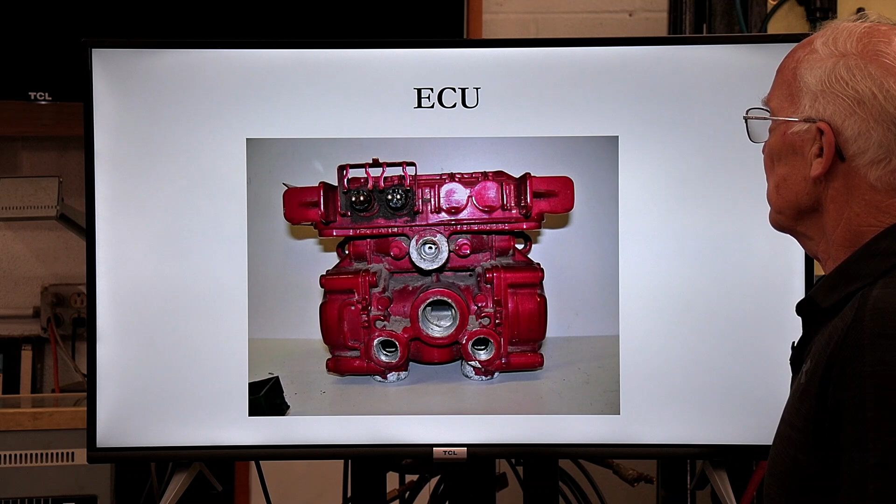And just a couple of slides. So next, this is a board setup I use, but this would be equivalent to an in-cab computer. Now here's the modulator valves. They regulate the brake application pressure to the controlled brakes. Again, if you're not receiving any commands from the ECU, it's just going to be a pass-through. You're going to put your brakes on just like you would normally, okay?

However, the ECU can typically command the modulator valve to reduce the brake application, hold existing pressure, or allow pressure increase. Again, it cannot increase the brake pressure above that applied by the driver, your foot pedal. The modulator contains 2 solenoids. If the ABS-controlled brakes are controlled by a relay valve, the modulating valve may be incorporated into the relay valve to control the input to the relay. It could be a separate valve.

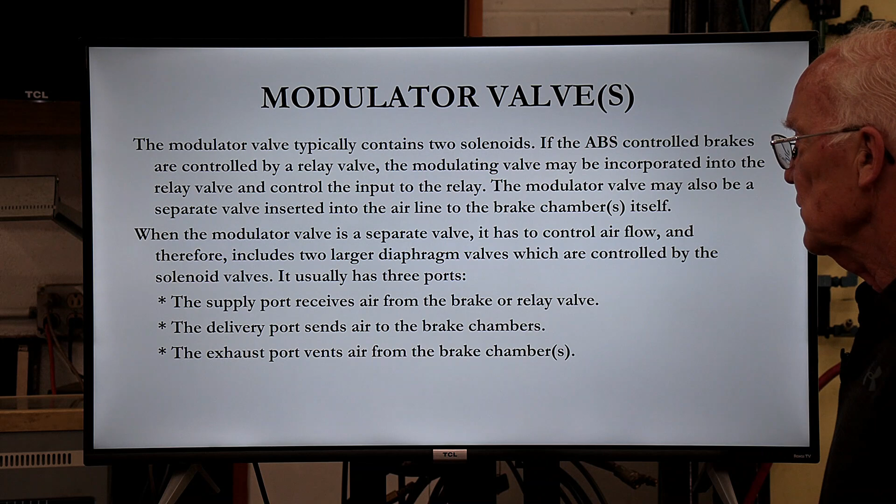Regardless, you get 3 ports: supply port, delivery port, and don't forget you're going to have an exhaust port. You have this in your handout. It walks you very briefly through what happens inside there with the solenoids. This is what your typical steer axle and drive axles might have, mounted between the relay and quick release valves. They control the air pressure in the brake chamber during ABS control. Supply, hold, release. That's what you're doing with these.

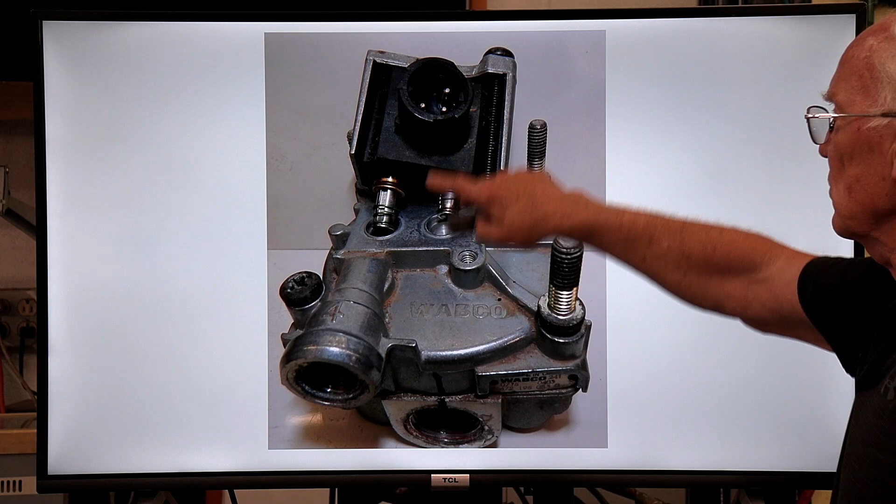This is an external modulator valve used in conjunction with the ECU. This is a specific system, 4-sensor, 3 modulator, premium configuration, controls air pressure in the brake chamber during ABS mode. I opened this up. If you ever open up relay valves, here's your little piston that goes up and down, closes the exhaust, opens up the inlet. The difference with this relay valve is you do have the electrical solenoids in there, you see them right over here. You got a common exhaust and supply.

Let me turn around real fast. I thought I had it working on a click, maybe I can get this to come on real fast. So where are you starting from? We might run 5 minutes late, guys. Whenever you... My fingers are on it just so they don't pop out.

But the bottom line is I'm using a power probe and I can make some changes. So for the sake of time, this is another one here. I'll give you a little backstory. This is a good one, okay? Let me go back and I'll do it one more time. Hopefully you can hear it.

But what this is, I got a phone call from Paul out of the Syracuse area. I'm looking at Bobby, he's doing my camera. He's an ex-commercial vehicle enforcement guy, so he's looking at me, now he's smiling.

Anyway, I got a phone call from Paul in Syracuse, quite a ways away from me. He says, hey, it's the end of the day. If I send you a video, can you let me know what the hell is going on here? They had 2 guys finishing the day and didn't expect this. One of the guys is thumping the tire to look for a soft tire, and the other guy happened to be underneath it. Otherwise they would never in a million years have found this. He said, whoa, every time you thump the tire, the push rod comes out. So he did it a few times.

He sent me the video, and I called him back. I said, Paul, go up to the driver, ask him if he's got the ignition key on. Driver key on. Thump it again. Yep, it's coming out. Tell the driver to shut the ignition key off. He shuts it off, thump it again. Stopped. Did it over, key on, key off. So I said, Paul, it has to be the ABS portion of it, because you got the modulator valve and all that stuff involved, and somehow that thumping is activating your brakes.

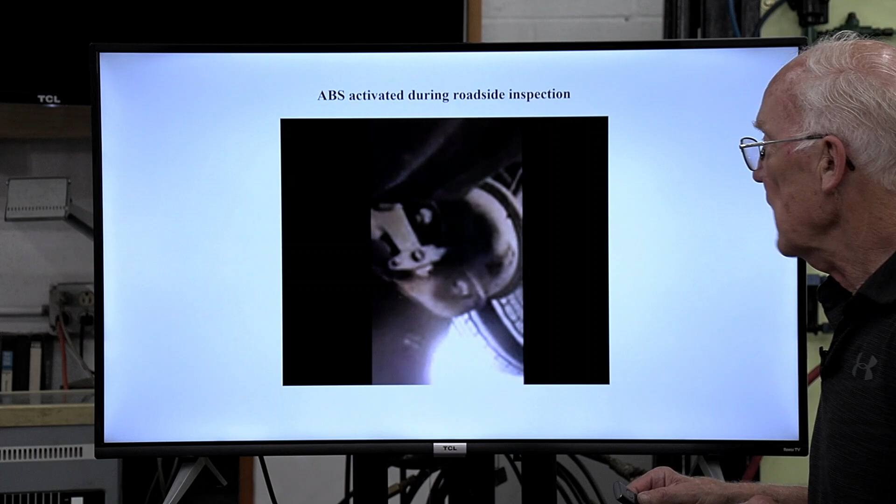But this is a nice thing with working with enforcement guys. I get a lot of videos and stuff, and we network together really, really great. So let me move on.

This is a front axle valve package, quick release valve, 2 ABS, okay. Rear axle, we already held that in my hand. Of course, you notice it doesn't have the solenoid for either the active braking or for your traction control, okay. Rather than what's inside this thing, as technicians we need to fix this stuff. It comes in a code, and if you look, this is a typical 12-volt solenoid. You only got 3 pins. You got a common, you got an inlet, and an exhaust, okay.

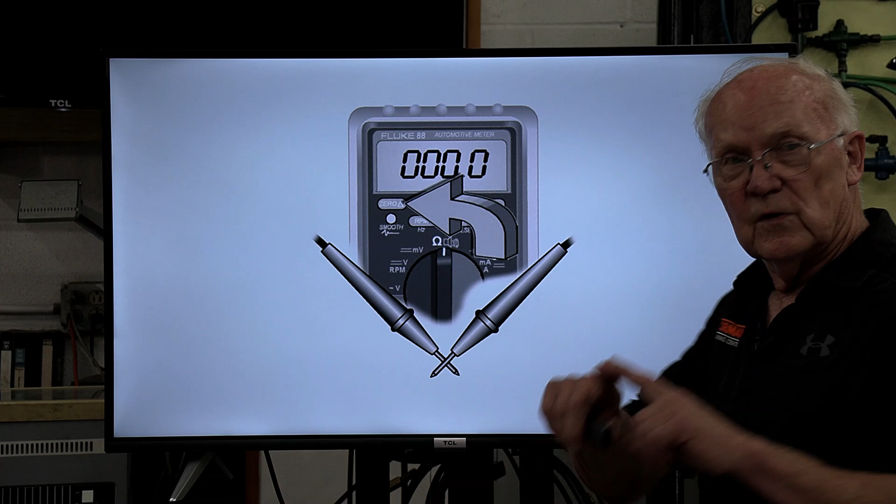And you see that, not cast in stone, but as a general rule, 4 to 8 ohms. And I'm going to tell you right now, when it comes to 4 to 8 ohms, this is your meter. Just think about it. If you were taking a reading, it came up 10 ohms, and I told you 4 to 8 ohms, that's 2 ohms more. Shame on you if you did not do this first with the leads and see if you have so much resistance in your leads, and of course you didn't account for that. Maybe you had 2 ohms in here.

Now my Fluke is nice because if I put them together, I hit the 0 button, and I'm down to 0. Already corrected, took away my resistance in the lead. And of course, here's your easy listening, click, click, click, click. We're going to continue this next month.

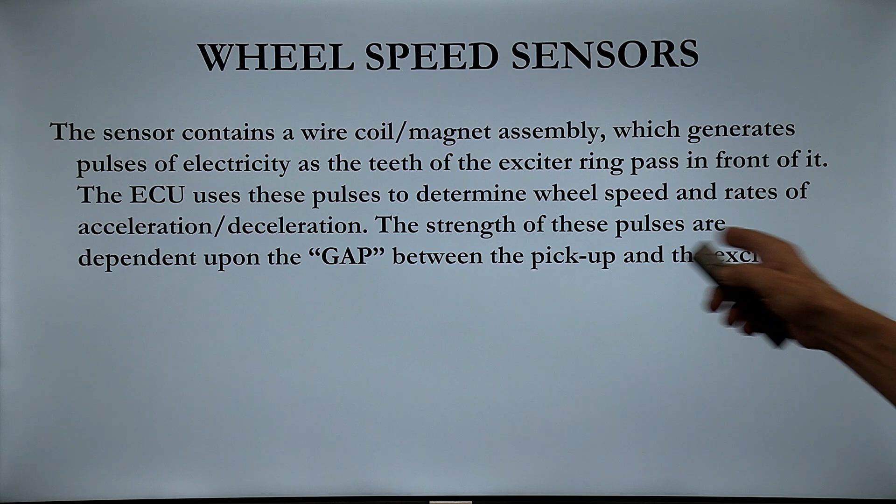Wheel speed sensor, exciter ring, sensor pickup, commonly called the wheel speed sensor, okay. All it is is a pulse generator, guys. Generates pulses of electricity as the teeth of the exciter ring pass in front of it. Strength of the gap. Let me do this real fast. Bobby, let me zoom in on this. Let me know when you get a good picture. You got a good picture? I happen to have a sensor over here. I'm gonna hook up my leads. They're not polarity sensitive or anything. And this is your wheel speed sensor over here, okay?

Just so you see this here. Now, yeah, that's perfect. What I wanted to do was I brought a wrench over here. So look at my meter. That's all I'm doing. That toner ring goes by there. I'm generating AC voltage, okay? It's that simple. Keep it simple. And like I said, next month we'll keep on with this.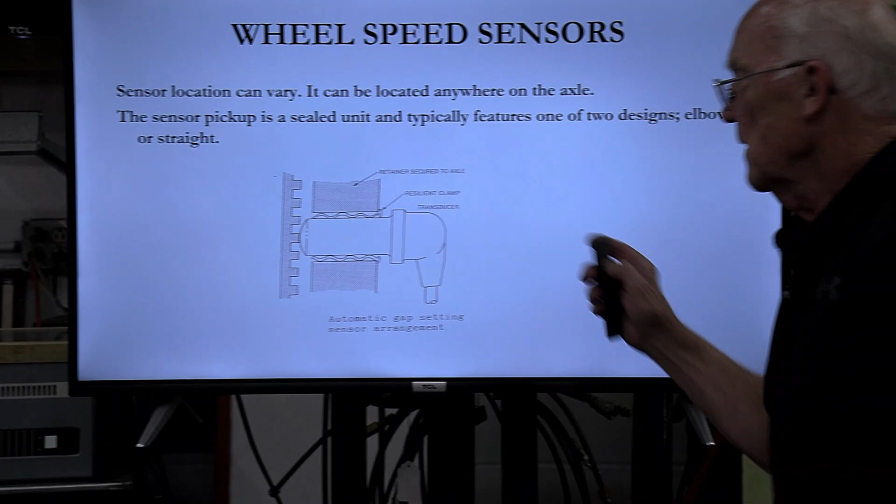Pulse generator. The nice thing about this is, guys, you change a sensor, just push it in. You're done. It will find its automatic gap. Till you make contact, wheel end play will find a sweet spot. Required gap, 40 thousandths or less. However, they are sensitive, so you want to make sure of your wheel bearing adjustment.

I've had vehicles where, for example, it's a pain in the ass to pull rear dual wheels when I want to check the bearing adjustment and everything else, to get at it, pop the axle out, and I could just barely turn my axle nut to do just a little minor adjustment, and guess what? Light goes out. Sensor arrangement, it could be either mounted or integrated with the hub wheel.

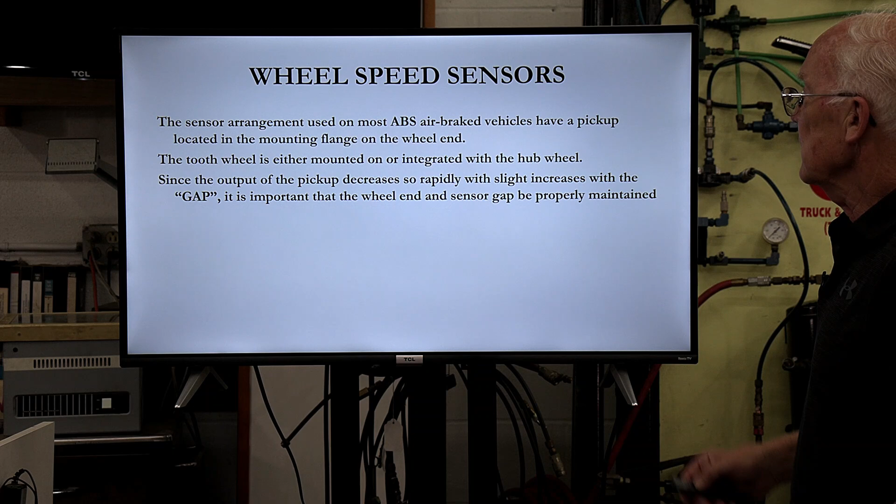Again, the gap is so important on these things, okay? Real world. Unfortunately, this is what we wind up with, and then you go to change that sensor, it does not want to come out. Everything is corroded in there, and in my shop, you can stay there, Bobby. In my shop, just to save time, I don't even mess around. I keep a whole box full of these, all sorts of different sensor brackets to make my life easier, because you can spend a lot of time with these things, again, real world.

When the wheels are on a tandem axle as wheel speed sensors, sensors are usually placed on the axle whose wheels are most likely locked up. A lot of guys don't realize this. On a tandem axle with spring suspension, sensors are generally on the lead axle. Tandem axle with air suspension, sensors are generally located on the trailing axle. And I have gotten it wrong, seen it wrong from the factory. Guys come in, complain, gee, my wheels tend to lock up and everything else. So keep that in mind.

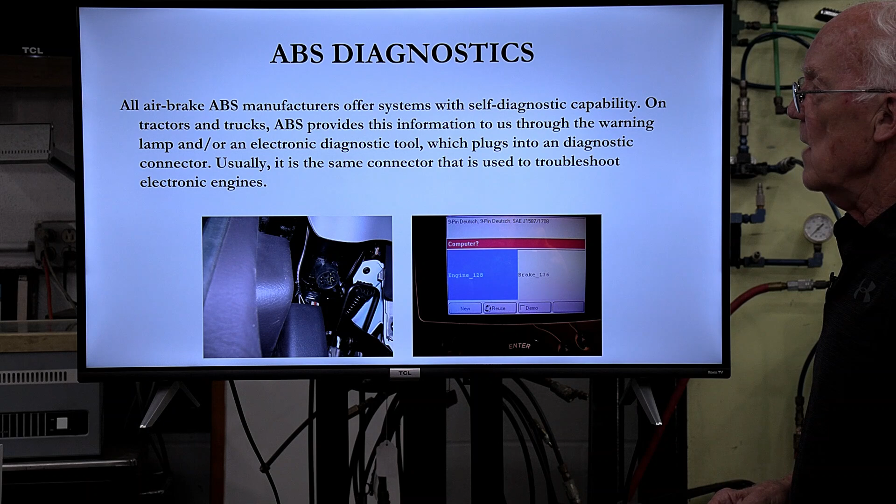So, diagnostics. Look, guys, you can do flash codes, you can go into a computer. I mean, they really did make it nice to do that. So, for example, you have a toolbox. Toolbox is nice, and basically what I have is a J-Pro, and I have it for trailers. It is so nice. I'm going to make a mess over here, but if you can scoot back, this is nice. I put my 7-way plug in here. I can power it up a couple of different ways, and then I can get into my toolbox. That's the Meritor software.

Right? And on the J-Pro, actually in their system, the Bendix is an ACOM, and they made a deal where the ACOM is part of their software. So, again, we'll get into all that next month.

ABS might use an ABS malfunction lamp, signal stored fault through a blink code. You run across vehicles that actually have a blink code switch. You might have to look for it, be someplace. Bendix used LEDs for a long time, okay. I'm not going to get into that, get into it next month, but this is a, oh no, real fast.

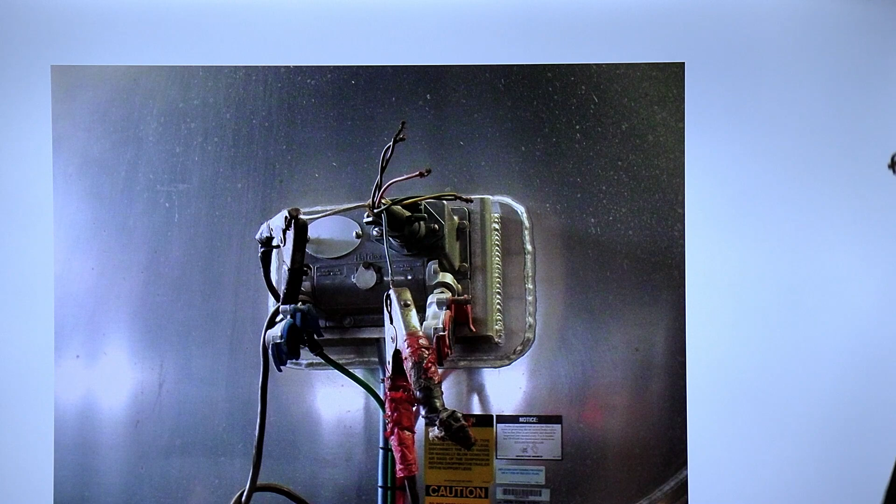In my shop, I got all the fanciest software. I told you it's J-Pro, I got a Can-Do, and all the stuff. But sometimes I pull a trailer in, it's just as easy. I got a little battery down here, got my 7-way plug, hook my power to the blue wire, there it goes, ground, and I can just go like this. First thing I do is, without hooking up the laptop or anything else, I just look over at the side of the light. It came on. Click, click, click, click, it went off, move on, okay? Pull the plug out. By the way, I can check my lights and everything with there.

If the light did stay on, however, and I do have all the information, I can go off, on, count the blink codes. I go in my little book, and it'll tell me what I got. So everybody's got their favorite method of doing stuff, okay?

Traction control, again, we talked a little about this. You're basically braking the spinning wheels and sometimes throttling back the engine power, okay? They're integrated into the ABS ECU. And basically, air pressure applied to brakes is supplied by a solenoid valve inserted into the brake control line going to the relay valve. I showed you that little solenoid. And again, it applies brakes on the spinning wheels when a wheel speed sensor tells the ECU.

So you got the existing stuff in there anyway. You got the wheel speed sensors, you got an ECU in there, you got the solenoid valves. That's why I said it's a mirror image of ABS. ABS takes pressure away, keeping it stupidly simple. Traction control puts pressure to the wheels, okay?

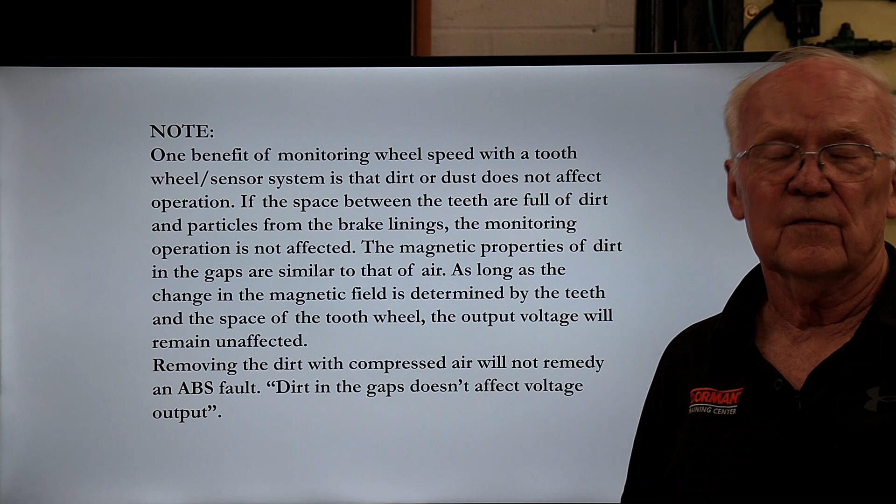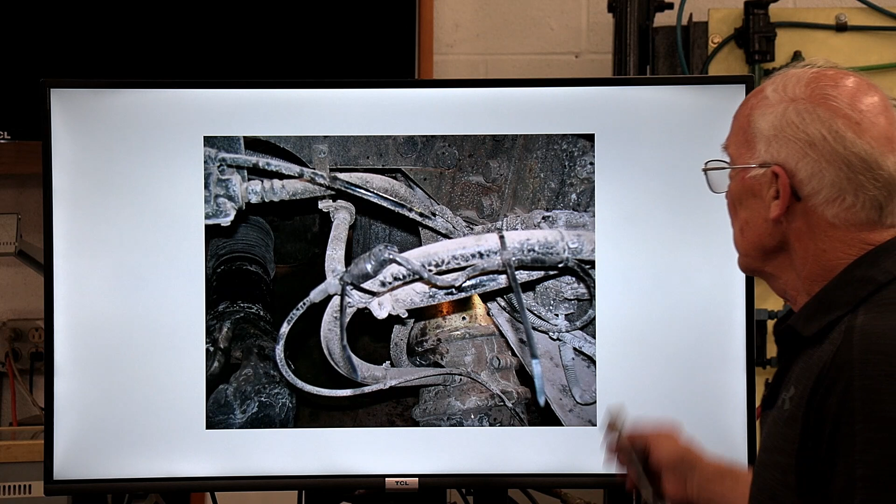Keeping it simple, guys, if you work on this stuff, I have a broken wire over here. I use my little tool, extract the end out of it. There it is, okay. I put a new wire through there, put a new end on, crimp it, and in my area, everything gets shrink connected. You heat it, make sure nothing gets in there, tie it up, secure it, and I'm on my way.

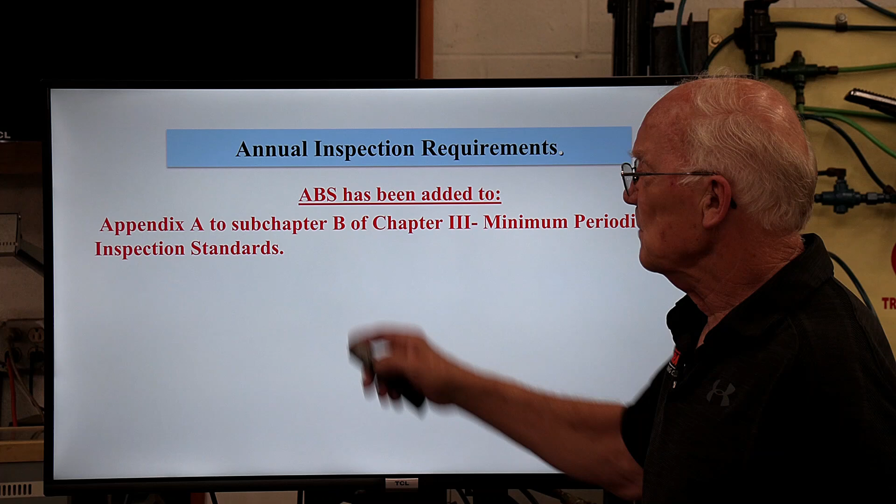Now, this is huge. Back in 2016, Appendix A: those of you that do federal annual inspections, you have to follow this. They put it as part of the annual inspection that if, for example, the ABS isn't working and the light is on, you reject it. Prior to 2016, it wasn't an annual inspection requirement. You'd still get violations on the roadside because it was in the federal regulations.

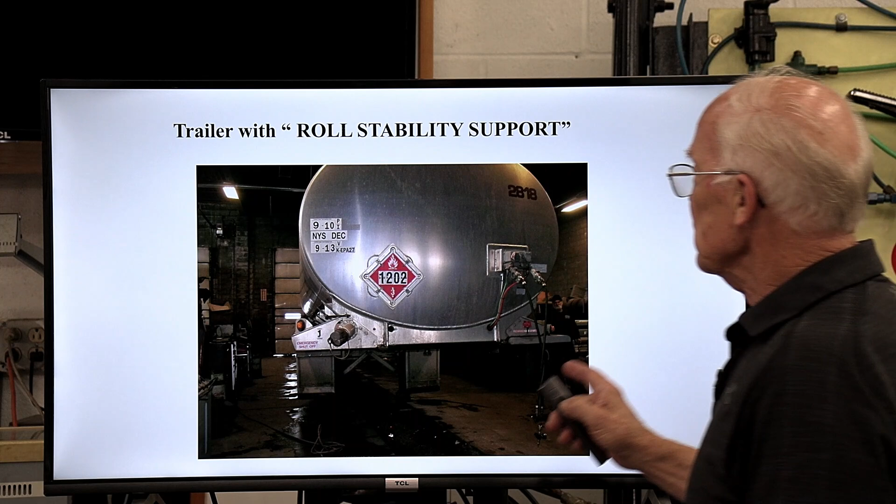Make sure you go in your handout and look at these exemptions, because you might run into a heavy trailer and say, oh my gosh, it doesn't have ABS. It's exempted. So keep that in mind. Now, I'm almost done with this. I mentioned that you don't really need a computer to work on these, and I'll bring that up again next month. This is one system you need to have a computer for.

This has a roll stability support, RSS. This provides additional assistance to maintain trailer directional stability. So it's a little bit more complicated internally. It's got a lateral accelerometer in there and all sorts of stuff. This is a pricey computer.

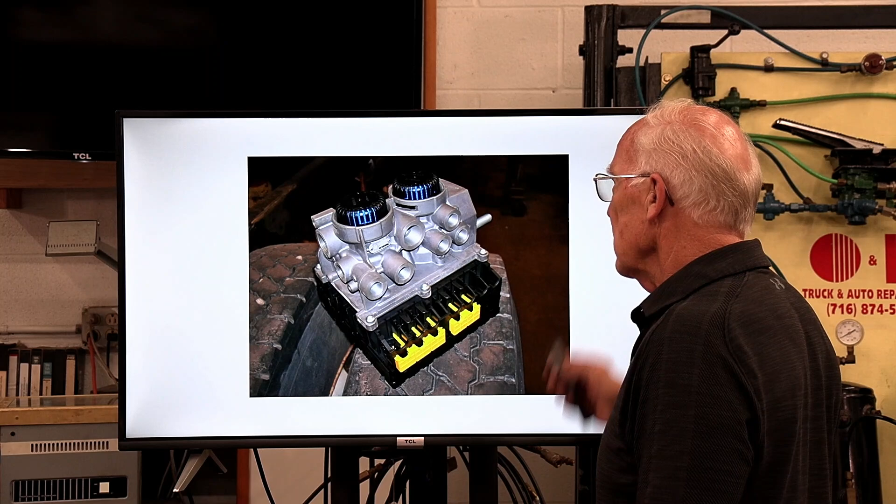When we first started getting this, the complaint from the driver was, I stepped on the brake and actually had no brakes. That's counter to what I've been taught, that you will always have brakes even if ABS fails. But I'm not going to spend much time on it. By the way, these are mufflers. There's exhaust coming out of there, and that can be an issue too. See these little mufflers? In our climate, between the road salt and everything else, you can take those out. Sometimes you might even fix the problem.

Look at all the crap in here. It's like a filter, a muffler. You can unroll it. I've unrolled it, cleaned it, and re-rolled them back up clean and dried. But this is what I'm talking about: if you don't have a computer, don't take that job on, because once you change your computer, you're going to have to do some end-of-line testing.

You go into your toolbox and you see WABCO Trailer RSS Diagnostics, and it goes through a bunch of checks, naturally wheel speed sensors and so on. You need to jack up the trailer, because it has lateral accelerometers, so it needs to know how the suspension is. You let it down, and if you follow the prompts, with your lines hooked up, it'll tell you to spin this wheel, and automatically it goes pop, locks it up, tells you to go to the next wheel, and you walk all the way around the trailer like this.

Well, I used to get phone calls. A lot of the guys didn't have the software, so yeah, I'll come over, we'll do it and stuff. Sometimes the guys would have the software, they would do it, and they go through the whole check, and it's like, the light still stays on. And I'd have to tell them, look, the final check, to be honest with you, is they want to see all four wheels spinning, all the sensors saying the same thing.

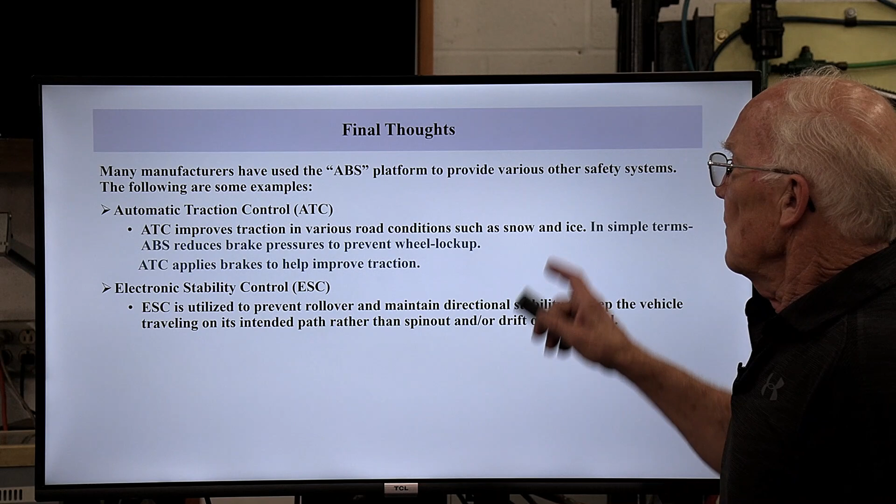So, my final thoughts. Many manufacturers use the ABS platform to provide various other safety systems. You needed that ABS first. We talked about traction control, okay? Improves traction in various road conditions such as snow and ice. Simple terms, I already used it: ABS reduces brake pressure, ATC applies it.

Then we went into electronic stability control. It's utilized to prevent rollover, maintain directional stability, keep the vehicle traveling on its intended path, spin out, and so on. Okay, and now we do get into a little bit more complications. As you see, you have more valves. Okay, tractor protection, active brake valve. We discussed that. Braking valving in the front, and of course, much more. Active braking systems utilize valve solenoids to provide braking during ATC or ESC events.

All the aforementioned, coupled with various sensors, cameras, radar, allow manufacturers to ease into collision mitigation. For example, WABCO's got their OnGuard, Bendix has their Wingman Fusion, they've had it for years. Okay, and they are driver assistance systems. Just like cars, these systems have become very sophisticated. One commonality with all these systems is electronics, sensors, radar, modules, and so on.

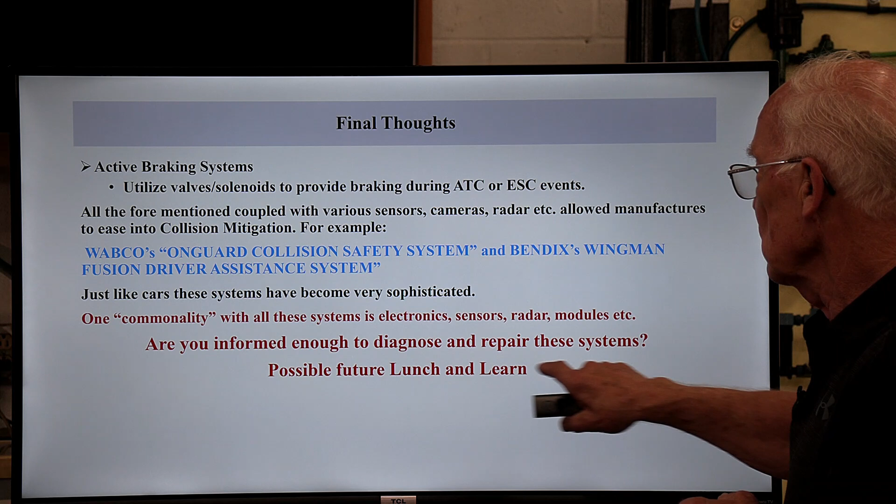My question, and I'll leave it off, is are you informed enough to diagnose and repair these systems? And this possibly could be a future lunch and learn, because it's just like you guys that work on cars with the ADAS systems. I'm foreseeing some possible issues, and they are looking to mandate these on these vehicles, which is another story.